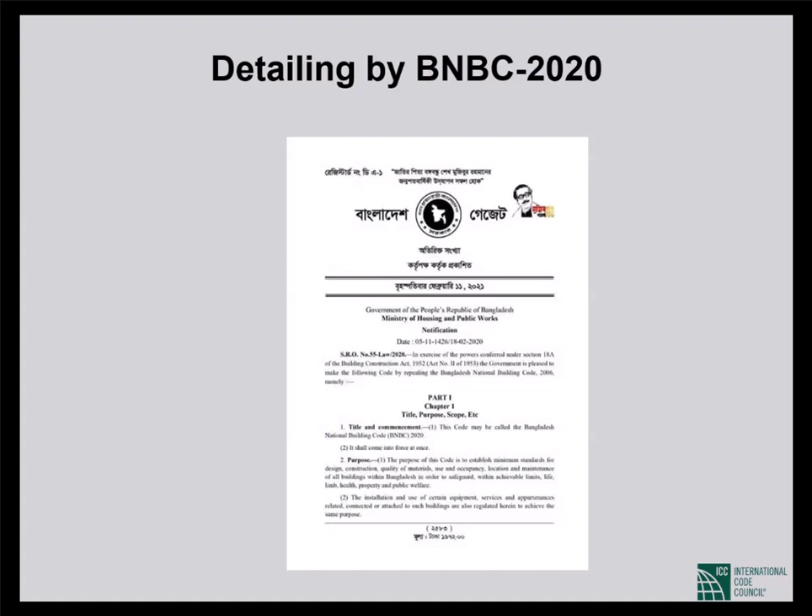The concrete and seismic concrete design provisions, including seismic detailing requirements of BNBC 2020, are based on those of ACI 318-08 edition, and that is kind of significant. I also mentioned yesterday that ACI has gone through 3 more editions since the '08 edition was published: 318-11 three years later, then 318-14, and then the latest, 318-19.

Between 318-08 and 11, there was at least one change that we will discuss at the very end of today's seminar.

In 318-14, there were major changes to shear wall detailing requirements that I have decided to bring into this seminar, and you will see that those are kept very separate. 318-19 has further changes that are kind of complicated, and I have decided not to go there. It's a long way off for you, I think, and too many editions would probably be confusing. So we will keep to 318-08.

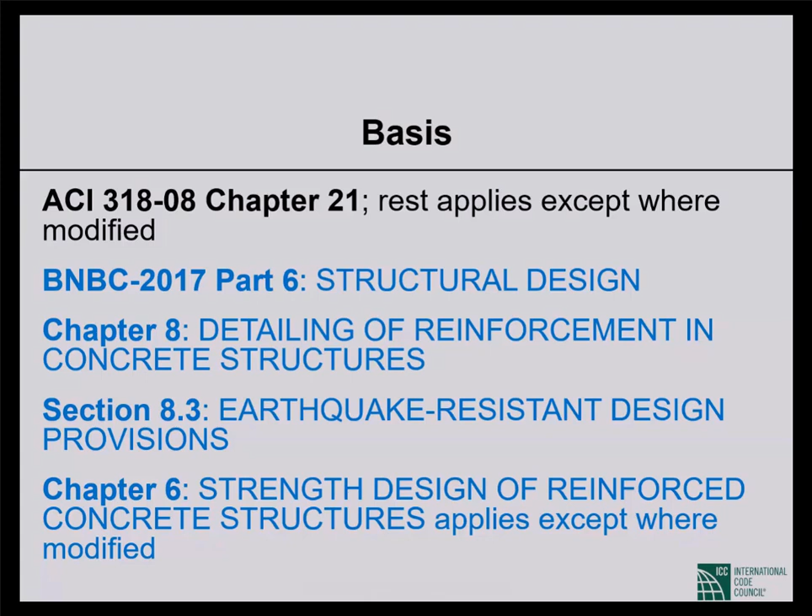Just as when we detail or design by chapter 21 of 318 the remainder remains in effect, when we design or detail by section 8.3, chapter 6 of BNBC 2020, which is strength design of reinforced concrete structure, it remains applicable unless something in there has been specifically modified in section 8.3. This is kind of important. I didn't have a similar slide yesterday because I pretty much kept to the 2008 edition of 318.

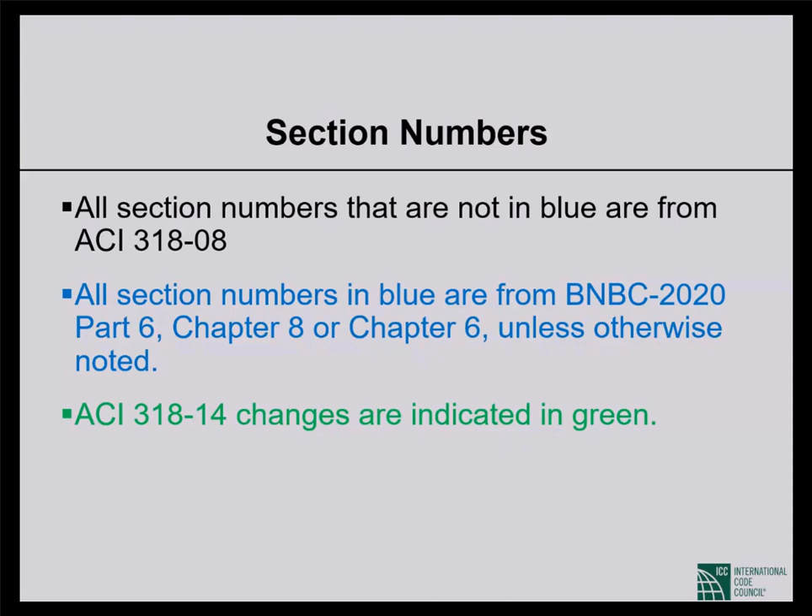All section numbers not in blue are from ACI 318-08. I should have said blue or green. All section numbers in blue are from BNBC 2020 Part 6, Chapter 8 or Part 6, Chapter 6, unless otherwise noted. ACI 318-14 changes are indicated in green. So keep that in mind: blue is BNBC and green is 318-14.

Inelastic deformation capacity is the ability of a structure to continue to carry full factored gravity loads as it deforms beyond the stage of elastic response. Elastic response doesn't have to mean force proportional to displacement—there is nonlinear elasticity—but elastic response does mean there will be no residual displacement after the earthquake passes, no damage to repair. So that is elastic response.

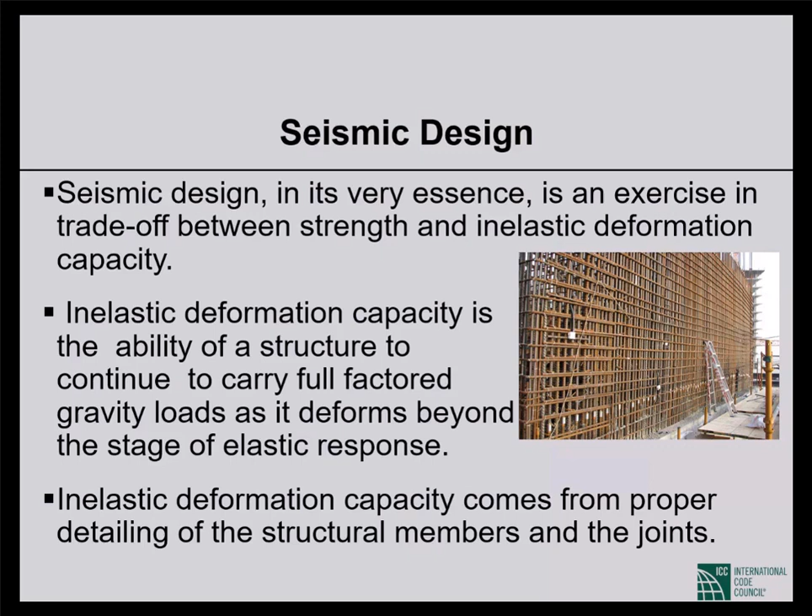We are saying inelastic deformation capacity is the ability of a structure to continue to carry full factored gravity loads as it deforms beyond the stage of elastic response. Inelastic deformation capacity comes from proper detailing of the structural members and the joints. So it is a trade-off: we can design for high strength and low inelastic deformability, or low strength and high inelastic deformability, or medium strength and medium inelastic deformability.

Chapter 16 of the IBC, which is part 6, section 2.5 of BNBC 2020, sets the design force level or strength. The code tells us the force level we need to design for, depending on the structure, the seismic hazard at the site, and so forth. Detailing rules are given in the materials chapters, which is chapter 19 of the IBC.

That's part 6, chapter 8 of BNBC 2020 for concrete. Chapter 21 of the IBC for masonry is part 6, chapter 7 of BNBC 2020. Chapter 22 of the IBC for steel is part 6, chapter 10 of BNBC 2020. Chapter 23 for wood is part 6, chapter 11 of BNBC 2020.

The materials chapters reference material standards. For concrete, the standard is ACI 318. So when you go to chapter 19 of the IBC, you don't find a lot of provisions there, because you are simply referred back to ACI 318.

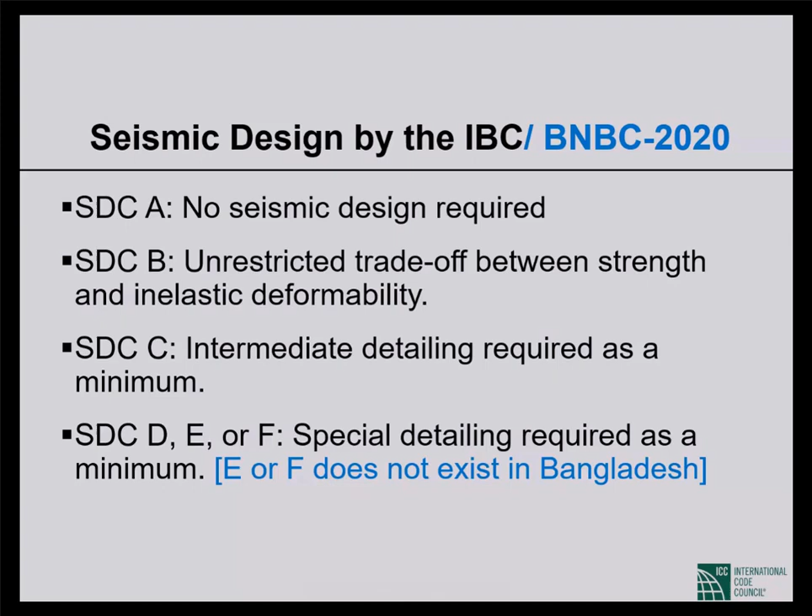Now, shear walls can be used in bearing wall systems, building frame systems, or dual systems. And dual systems are of two kinds in ASCE 7 and BNBC: dual systems featuring intermediate moment frames and dual systems featuring special moment frames.

If we have special reinforced concrete shear walls as part of a bearing wall system, R value is 5. And if we have ordinary reinforced concrete shear walls, R value is 4. There is no intermediate reinforced concrete shear wall recognized in our codes and standards. There is an intermediate shear wall that is precast, but we will not go there. We are not discussing precast. It is not mentioned in BNBC 2020.

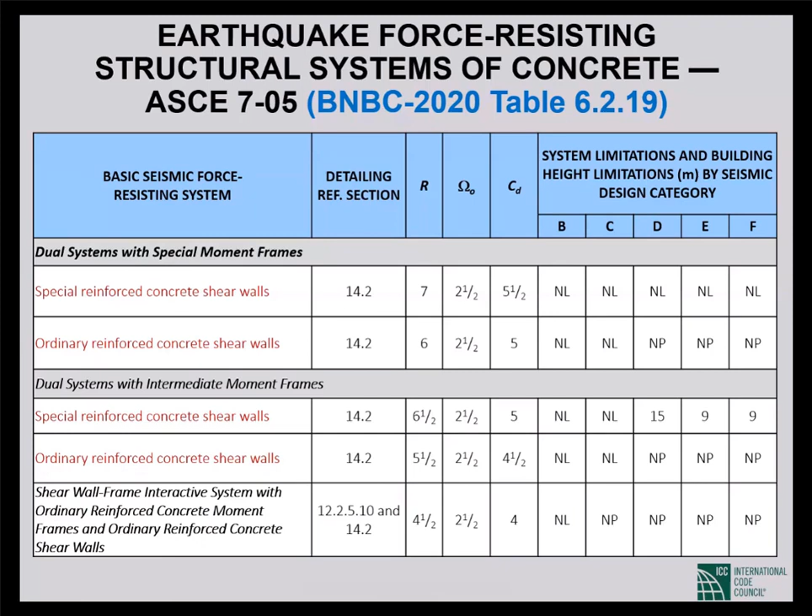Dual system with intermediate moment frame, if it has special reinforced concrete shear walls, R is 6.5. Ordinary reinforced concrete shear walls, R is 5.5.

But this dual system with intermediate moment frame has restrictions on applicability. In high seismic design category, in your case D is the highest, 15 meters should be the height limit on the structural systems. And the dual system with intermediate moment frames and ordinary reinforced concrete shear walls is not even permitted. So you have to look at these restrictions. Actually, this is about the only system where you will have to deal with restrictions.

Well, I didn't quite say it right. The ordinary detailing, as I said, is not allowed in design category D. So when it is ordinary reinforced concrete shear wall, you would expect it's not permitted in design category D. You see it here, you see it there, and you will see it on the earlier tables as well.

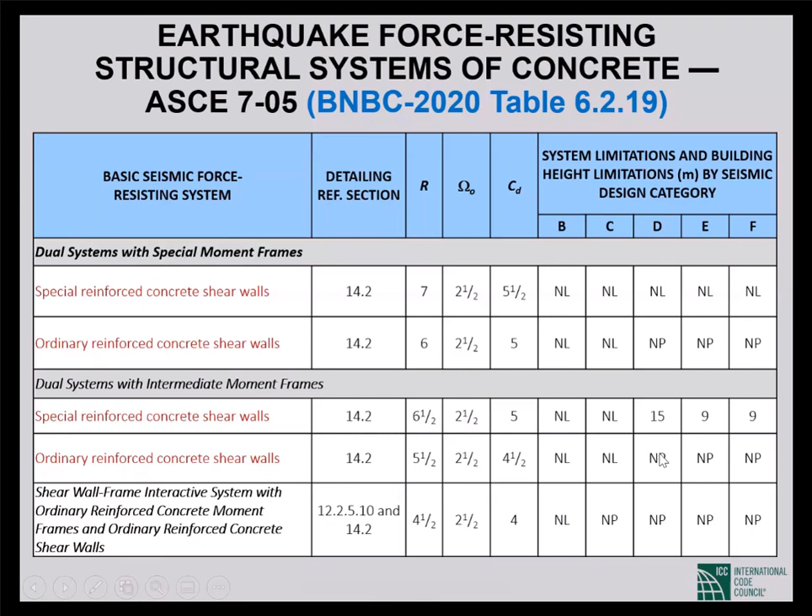Anyway, so that gives you an idea of the R values that we are dealing with. So for a special moment frame, R of 8. For a special shear wall, depending upon which structural system it is part of, R value varies between 5 and 7: 5 for a bearing wall system, 7 for a dual system with special reinforced concrete moment frames.

Then the restrictions on materials, these are the same as we discussed yesterday. The same restrictions on materials apply when you construct special moment frames or special shear walls of reinforced concrete.

I repeat, the restrictions on materials that we discussed yesterday apply to special moment frames of concrete. The same restrictions apply to special shear walls of concrete, as well as coupling beams that we will discuss today and wall piers that we'll discuss at the end of the seminar today. So the same restrictions, I will go over them quickly.

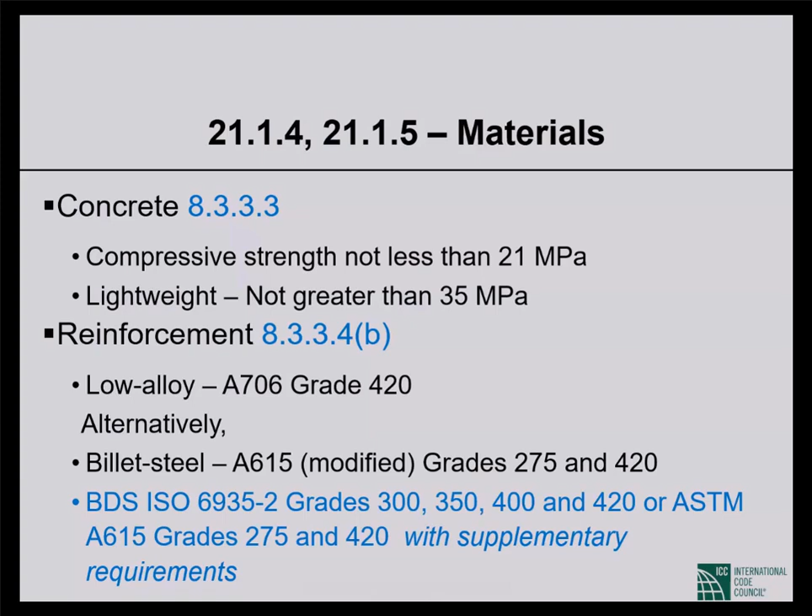BNBC 2020 allows the same A615 grades 275, which would be 40 KSI, and 420, which would be 60 KSI, with supplementary requirements. But BNBC also allows Bangladesh standard ISO 6935-2 grades 300, 350, 400, and 420. I understand that quite a bit of that reinforcement is used, but anyway, that's the only difference between ACI 318 and BNBC 2020. This Bangladesh standard reinforcement is allowed in high seismic applications.

The supplementary requirements for A615 rebar steel for high seismic applications. These we also went over yesterday.

The actual yield strength shall not exceed the specified yield strength by more than 18,000 psi. Upon retest, you can go another 3,000 psi, but that is the maximum allowed. This retest requirement was in 318-05. I didn't find it in 318-08, which is why I put it in blue. It is part of BNBC 2020, though. You have that in there.

As I mentioned yesterday, this is an extremely important supplementary requirement. This requirement is already part of ASTM A706, but for A615 this is a supplementary requirement for seismic applications. This is important because in seismic applications, more is not better. If you have higher yield strength in your reinforcement than specified, the member reinforced with that steel will have higher flexural strength than you counted on. That member will attract higher shear forces to itself in an actual earthquake situation. You will not be correspondingly increasing the shear strength of the member, making brittle shear failure more likely. And that is not good.

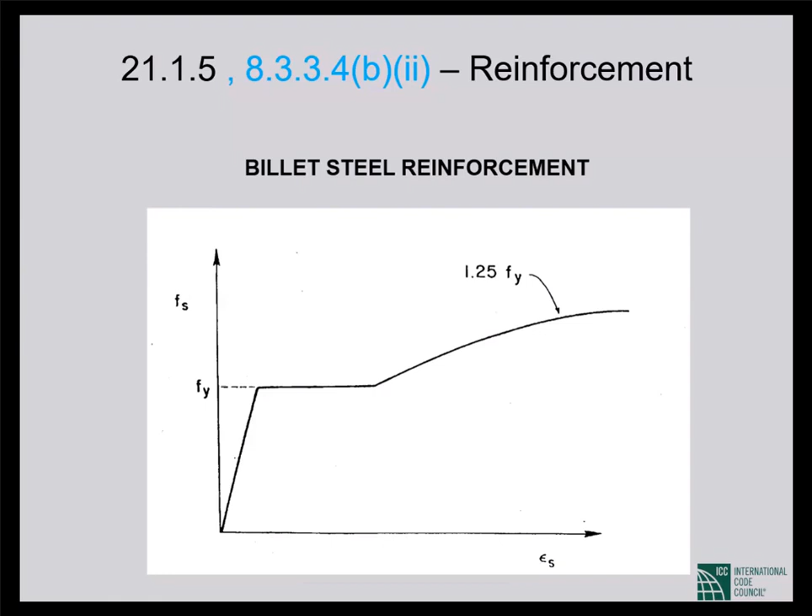And finally, the measured ultimate tensile strength shall be no less than 125% of the measured yield strength of the reinforcement. So, three supplementary requirements: the actual yield strength shall not be greater than the specified yield strength by more than 18,000 psi; the elongation over an 8-inch gauge length must be the same as that for A706 reinforcement; and the tensile strength to yield strength ratio shall not be any less than 1.25.

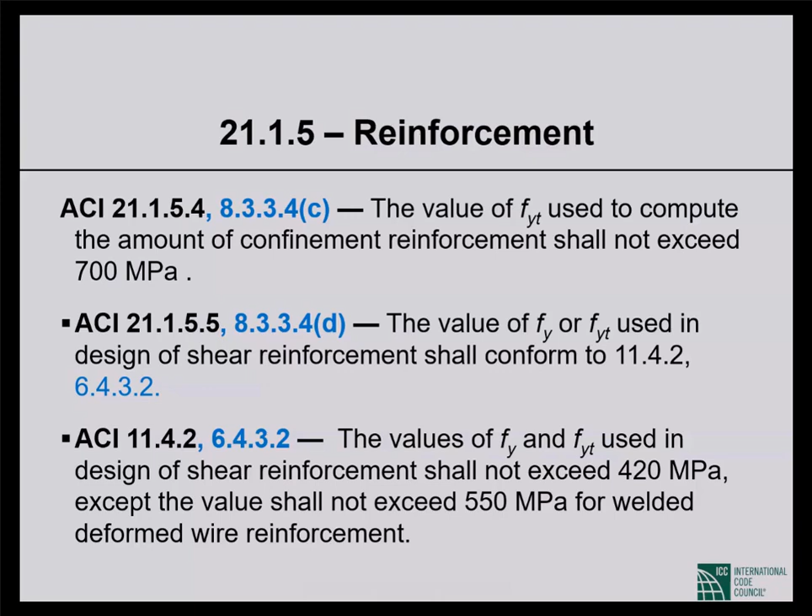If we allow shear computations based on higher yield strength, then we'll be looking at wide shear cracks, which are very objectionable. So this is why the restriction. But for confinement purposes, we are allowed up to 100 ksi yield strength of the transverse reinforcement, and yesterday I explained why that is very significant indeed.

So now we come to the design of special shear walls for shear. We have to design every structural member, if it is a column or a shear wall, for shear. We also have to design it for combined flexure and axial load. Typically with shear walls, we design for shear first, and then we proceed to designing for flexure and axial load, which comes after we are done with shear.

Now, this is the first significant green that you see in my slide set. Green, remember, is 318-14. Requirements for special shear walls changed in significant ways in ACI 318-14, in view of lessons learned from the Chile earthquake of 2010.

So the shear wall requirements of ACI 318-08 that we are discussing today started in the 318-99 edition. From 99 through 2011, the provisions remained essentially unchanged—we made maybe little changes here and there, but essentially unchanged. Then in 2014, very significant changes that cover many aspects of shear wall design, and as I mentioned, we will not go there today. In the 2019 edition, there is a further round of significant changes.

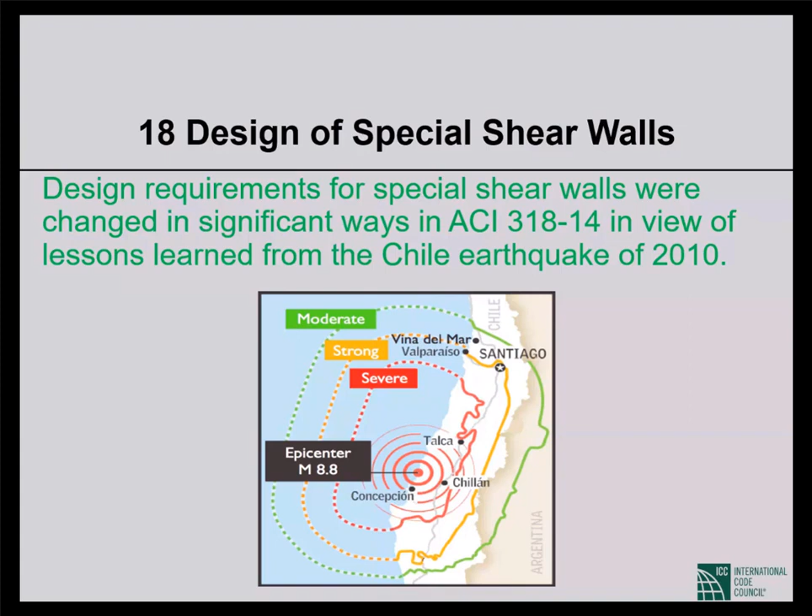Now, as in the design of any member, in the shear design of shear walls, the required shear strength Vu must be less than or equal to the design shear strength—the nominal shear strength Vn reduced by a phi factor, which is typically 0.75, although there is a complication there in the design of shear walls that we will discuss.

Very importantly, you saw yesterday that in the design of beams as well as columns of special moment frames, we design for the maximum shear that can develop in the beam or the column. In the case of shear walls, we do not do that—we basically are not able to do that. We cannot figure out even today, with any degree of precision, the maximum shear that may develop in a shear wall section in the event of earthquake excitation.

So we design for Vu coming from analysis of our structure under code-prescribed seismic forces. This is very, very important: we are designing from shear obtained from elastic analysis, rather than the maximum shear that can develop in our shear walls.

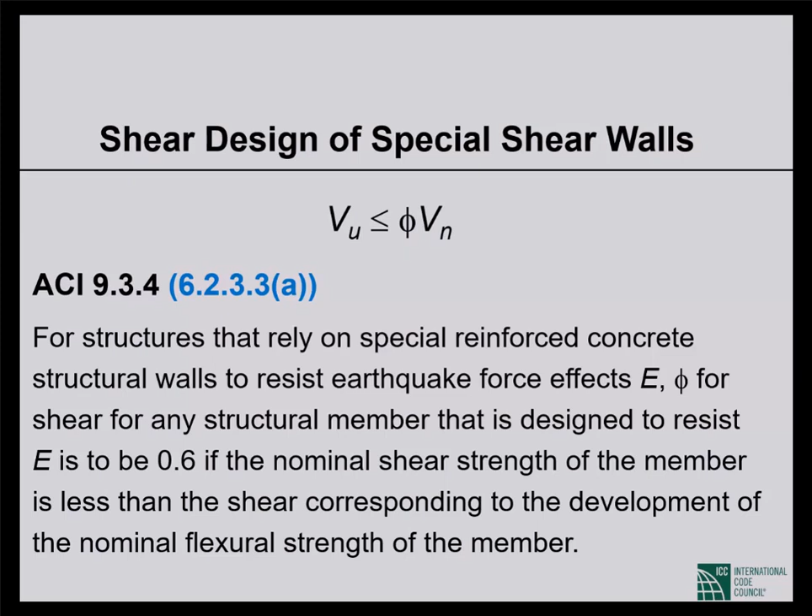So the V sub n is the shear carrying area of the shear wall, A sub CV, times the two contributions to shear strength: concrete contribution, alpha sub c times square root of f sub c prime, and the steel contribution, rho sub t times f sub y.

But let me put it this way. If you look through ACI 318, concrete can carry 2 square root of f sub c prime. In your units, I believe the number is 0.17 square root of f sub c prime. Concrete is always good for 2 square root of f sub c prime.

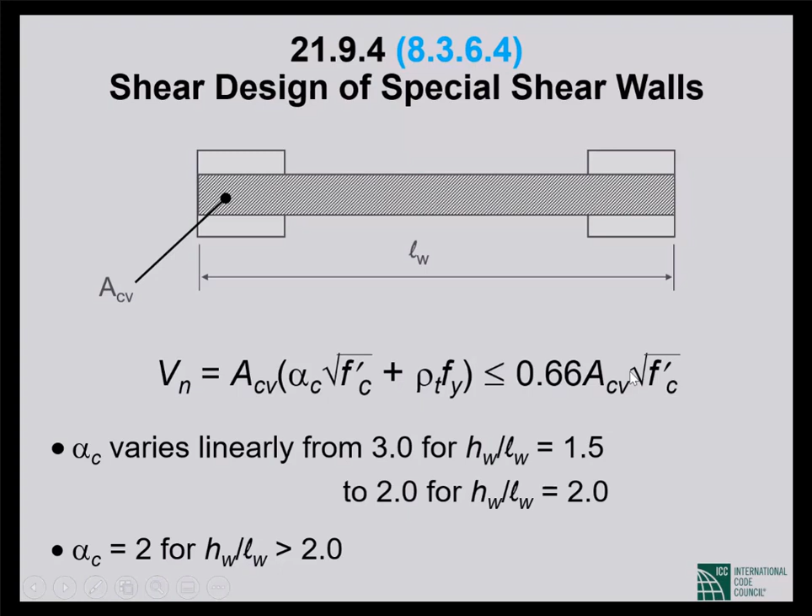This is because when the shear is very high - imagine a shear wall with a point lateral load applied at the top - when that horizontal load is very high, it will be transmitted to the foundation through diagonal struts that form within the shear wall. Those diagonal struts will crush in compression under high shear load, and no amount of reinforcement will prevent that compression crushing. So this limit is the upper limit; you cannot go beyond that.

Shear design - okay, the ratio. This is a detail that I'll let you read. These are very important: the minimum longitudinal reinforcement ratio, you have to have 0.25% longitudinal reinforcement, which would be vertical reinforcement in a shear wall, at a spacing not to exceed 450 millimeters, that's about 18 inches.

So, minimum vertical reinforcement: 0.25%, maximum spacing 450 millimeters. Horizontal reinforcement also minimum 0.25%, maximum spacing 450 millimeters. You shall provide 2 curtains of reinforcement when V sub u, the required shear strength, exceeds 2 square root of f sub c prime. ACI 318-14 says, or when height-to-length ratio is larger than or equal to 2.

So from 318-14 onwards, we have to provide 2 curtains of reinforcement in the taller, slenderer shear walls - height to length ratio larger than or equal to 2 - irrespective of how much shear you are dealing with. But shear exceeding 2 square root of f sub c prime will also trigger 2 curtains of reinforcement. Now, I would like to say that... how do I want to put it?

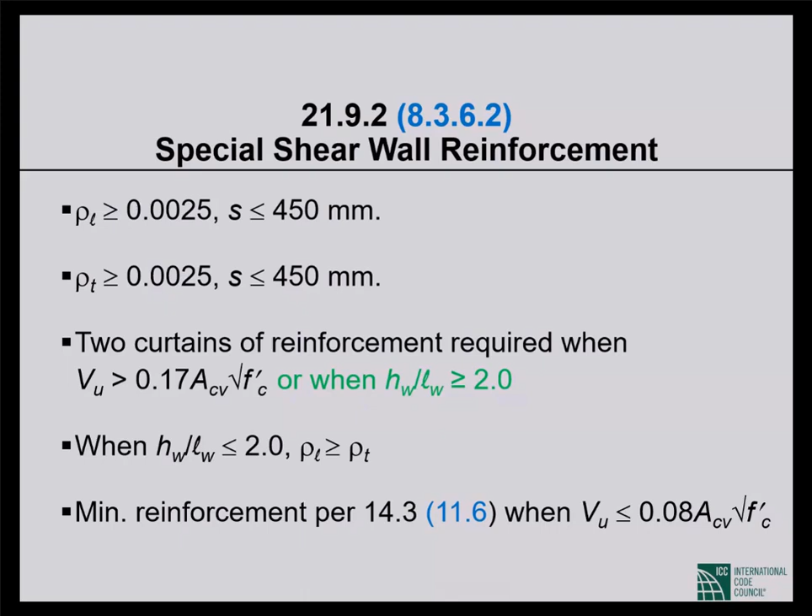Now, if the shear is less than 1 square root of f sub c prime, 0.08 in your unit square root of f sub c prime, then your horizontal reinforcement is shrinkage reinforcement. It's not shear reinforcement really. There is hardly any shear. And then those minimum requirements can be relaxed. 0.25% can be down to, I don't remember, 0.2 or even lower, 0.18%, I think is allowed. This is now chapter 14 of ACI 318, your section 11.6. You take your minimum from that section. Okay, it's no longer 0.25%.

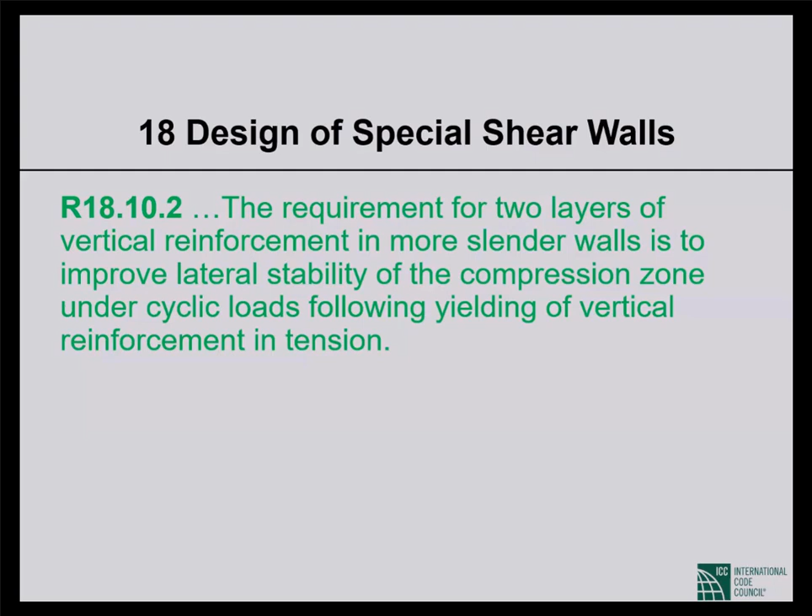This is a 318-14 commentary. When you see R in ACI 318, it is a commentary section. Every other document's commentary is C. In ACI 318, commentary is R. The idea is that the ACI 318 standard itself is a standard which eventually becomes code when adopted by a jurisdiction. The commentary is a report from ACI Committee 318. It never becomes legal or code. The R stands for report. Anyway, the commentary says the requirement for 2 layers of vertical reinforcement in more slender walls is to improve lateral stability of the compression zone under cyclic loads following yielding of vertical reinforcement in tension.

Okay, now special shear wall design for flexure and axial compression.

Yesterday I was quite confused about time. It's approaching 8:30 in Dhaka. So no, I have time. No, I don't think it should be a problem today. Okay.

This is the only time that I will take you back to 318-95, which was the 318 edition preceding 318-99, when I said the current shear wall design was first introduced. Okay, so back in those days, 318.95 and earlier, in designing a shear wall, what we had to do was to calculate...

Let's look at this picture. So we used to take the factored axial load tributary to the shear wall. It is not the weight of the wall; this is all the load that we are dumping onto the shear wall. So factored axial load tributary to the shear wall, divide that by the gross cross-sectional area, that gives us a uniform compression across the shear wall section. Then we took the factored overturning moment at the base of the shear wall, which should be caused by the code prescribed seismic forces, divided by the gross moment of inertia of the shear wall section, multiplied by half the length of the shear wall.

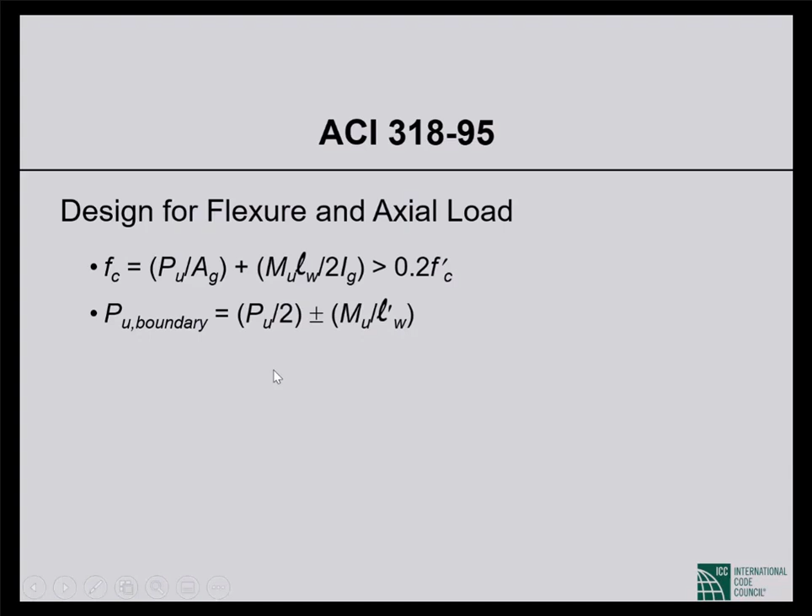This resulted in very large boundary elements with extremely large amounts of vertical reinforcement required, as you would imagine.

Let me talk about the confinement. Let me go to the picture and then come back to the two slides.

This is a building we designed in the UBC days, quite some time ago. A concrete building, frames on the periphery, and L-shaped shear walls in the core. The shear walls are boundary elements, I think the picture is pretty clear. This was UBC seismic zone 4, a 20-story tall building. The beam sizes are given, the column sizes are given, and the walls are 300 millimeters thick.

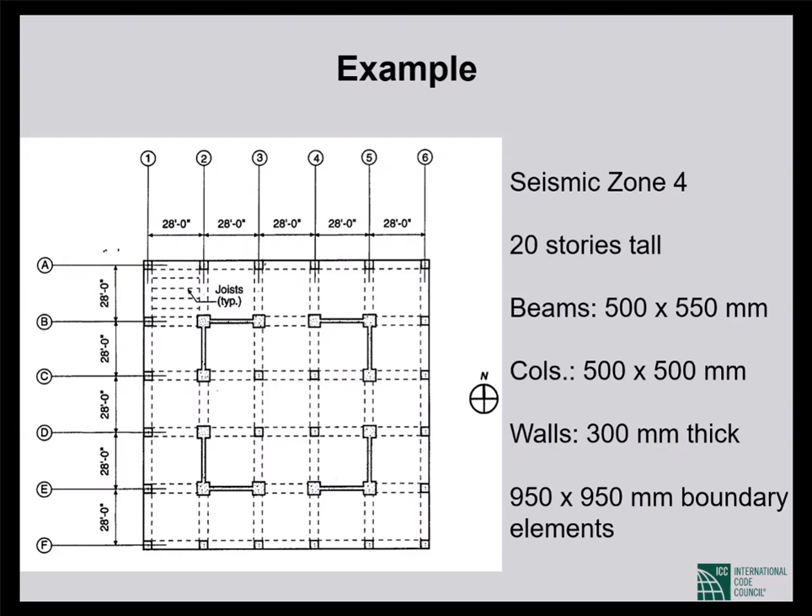So far it's not good, but the actual nightmare is that these 36 number 11 bars had to be tied and cross-tied like column bars. Every other bar laterally confined by the corner of a tie or a cross tie, maximum spacing center to center between any two supported bars 14 inches, and maximum clear spacing between a supported bar and an unsupported bar 6 inches. So we were looking at one tie all around and then multiple cross ties in the two orthogonal directions. In a column, this had to be provided over the region of potential plastic hinging.

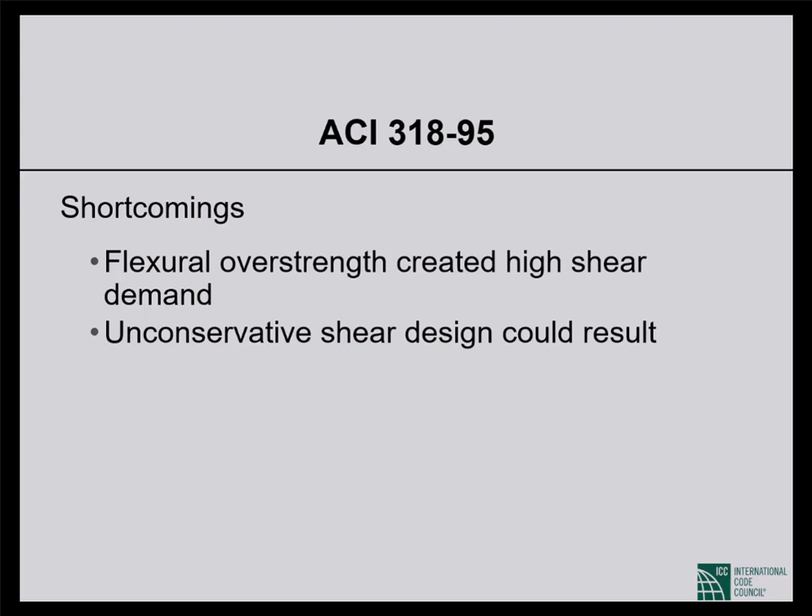So unconservative shear design was the result of providing all this flexural reinforcement. What looked like a very conservative thing was not even a safe solution - this was actually unsafe, unconservative.

ACI 318-99, or before that 94 UBC and 97 UBC, first said forget about discounting the web of the shear wall - that does not make any sense. That was a throwback to the days when shear walls used to be infill frames and the infill used to go in an earthquake. Now we have monolithic shear walls. So ACI 31899 said design a shear wall for flexure and axial load just as you design a column for flexure and axial load, with the entire cross section being effective.

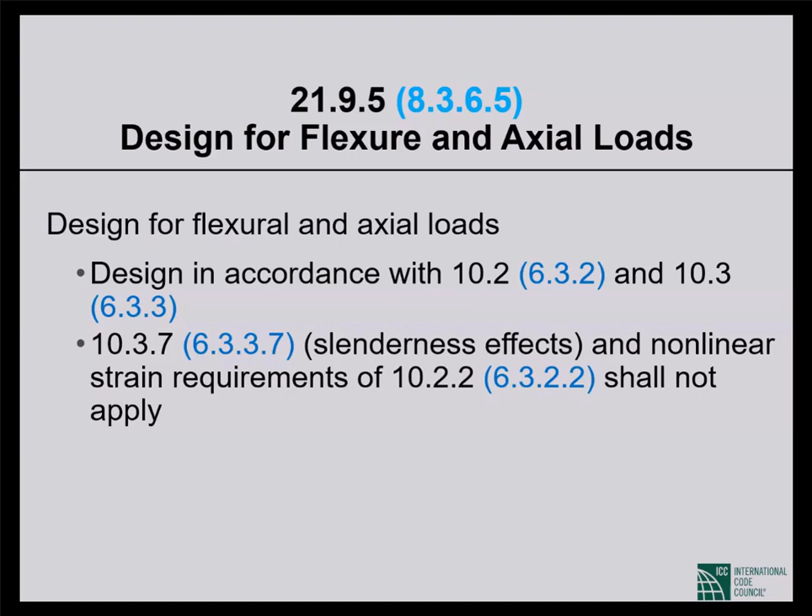And don't worry about slenderness effects or the fact that because a shear wall is a deep structural element, the strain distribution may not be linear - don't worry about those things. So design a shear wall as you would design a column under flexure and axial load. This was a huge change from the past.

Some details on effective flange width: if your shear wall has flanges, which is typically the case, the effective flange width is half the distance to the next cross wall, or 1/4 of the total wall height, whichever is smaller. So the effective flange width is 1/4 of the total wall height, except that you cannot encroach onto the flange of the neighboring cross wall - you can go only halfway to the other cross wall. This is a whole lot.

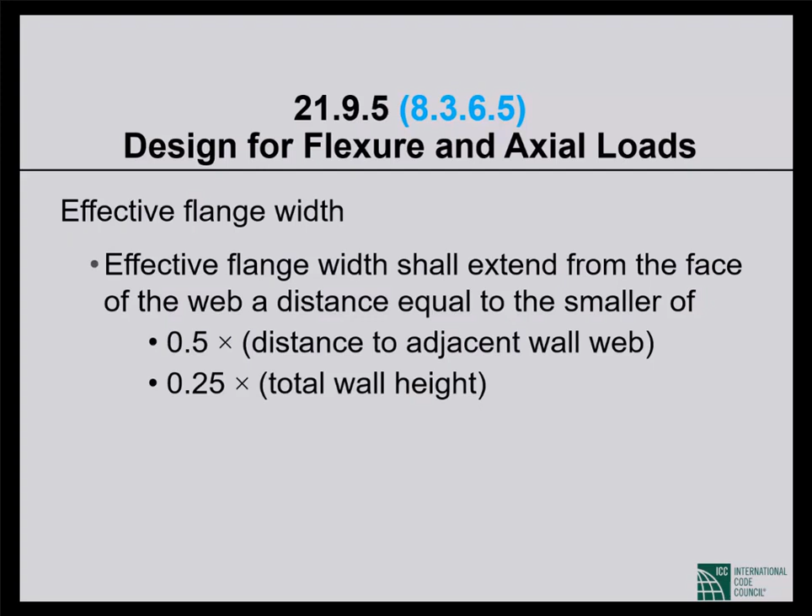So it is very seldom that you will have to ignore any part of a physical flange that you have. Anyway, so this is a very generous effective flange width.

Now, very importantly, there are two ways of designing, two ways of figuring out whether we need specially detailed boundary elements in our shear walls. One is called the displacement-based approach, that's 21.9.6.2 of ACI 318, 8.3.6.6B of BNBC. The other is the conventional approach that preceded the displacement-based approach, that is in 21.9.6.3 and 8.3.6.6C of BNBC 2020.

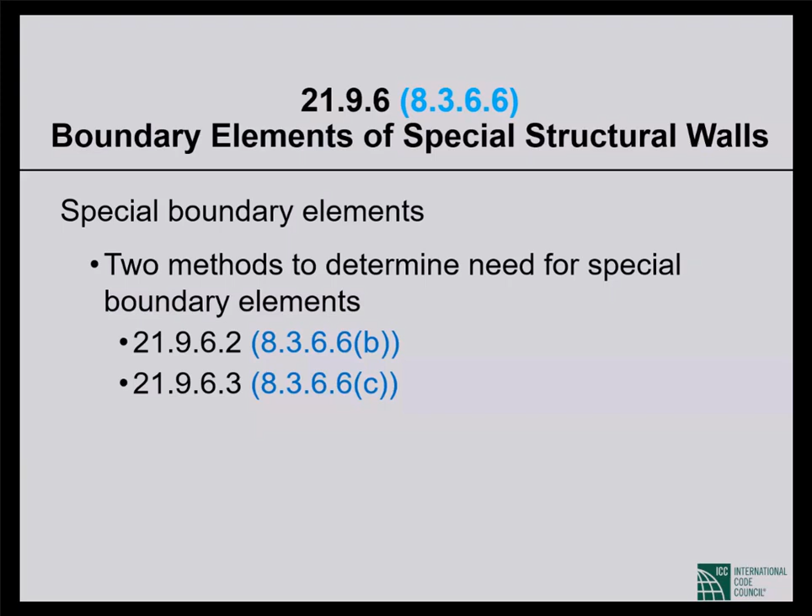The displacement-based approach is not applicable to all walls. It is applicable to cantilever shear walls hinging at the base. This is the best way to think about it. I will show you the 318 language on the slide, but we are basically talking about cantilever shear walls hinging at the base.

So the displacement-based approach is applicable to walls or wall piers that are effectively continuous from the base of the structure to the top of the wall. So it hinges at the base, not somewhere in the middle where the section changes all of a sudden, and is designed to have a single critical section for flexure and axial loads. Again, cantilever shear wall hinging at the base.

ACI 318-14 has said the height to length ratio in addition has to be larger than or equal to 2. So the displacement-based approach will not apply to shear-governed shear walls, it will only apply to flexure-governed shear walls. This is 318-14.

Now, this is the crux of the whole thing, and please listen to me very closely. So I made a statement that starting with 318-99, when we design for flexure and axial loads, we do not make any distinction between a column and a shear wall. That is fine, that is well and good. But practically looking and speaking, there is a huge difference between a column and a shear wall.

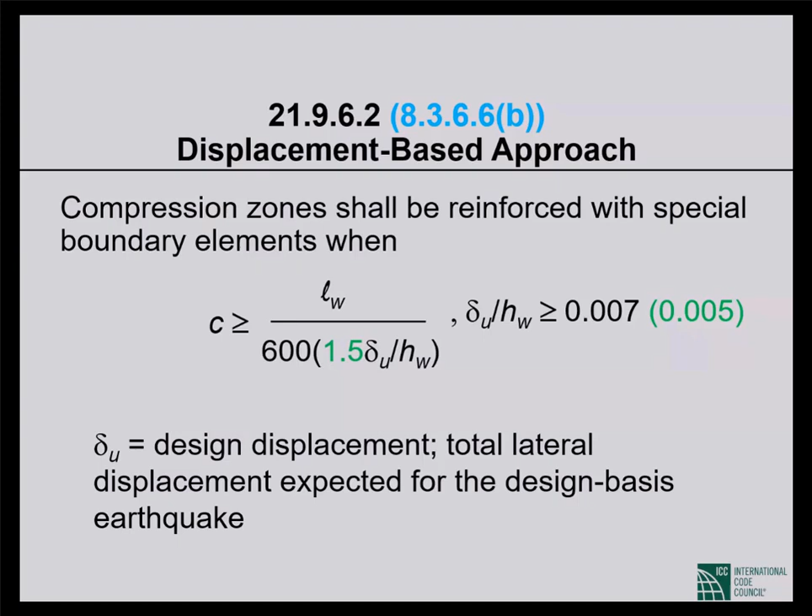Now, ACI 318-14 has injected the 1.5 factor in the denominator, thereby requiring many more shear walls to have specially detailed boundary elements. Let me not go into this 318-14 requirement. You will not be using it, you should not be using it, this is not your code. I just wanted to give you an idea of what is coming in the future, and there will be ample time to explain why this was done before that time. So let's stay without the 1.5.

Now, the neutral axis depth. Neutral axis depth is the distance from the extreme compression fiber to the neutral axis. That doesn't help you, because the problem is neutral axis depth depends on the axial load sitting on your shear wall. The larger the axial load, the larger the axial compression, the larger the neutral axis depth. In the extreme, if there is no bending moment, only axial compression, the neutral axis depth is infinity, since the entire section is under compression.

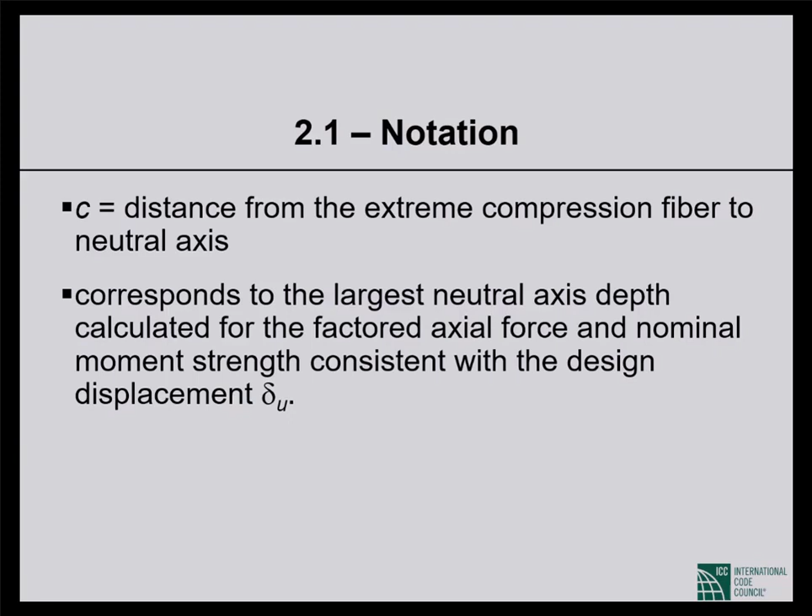So if we have a variety of axial loads on our shear wall to deal with in design, for the purposes of that check we would like to have the largest neutral axis depth. Whichever axial load produces the largest neutral axis depth is the load combination we should consider. You see what I'm saying? If we want to see if something is larger than something else, we would rather like an upper bound value of the thing we are checking.

So in seismic design, we have two load combinations to consider: the additive seismic and the counteractive seismic, that I've been talking about for a long time. The additive seismic load combination will always give you a higher axial load than the counteractive seismic. I do not know that there is ever any exception to that. So, the larger the axial load, the larger the neutral axis depth, remember?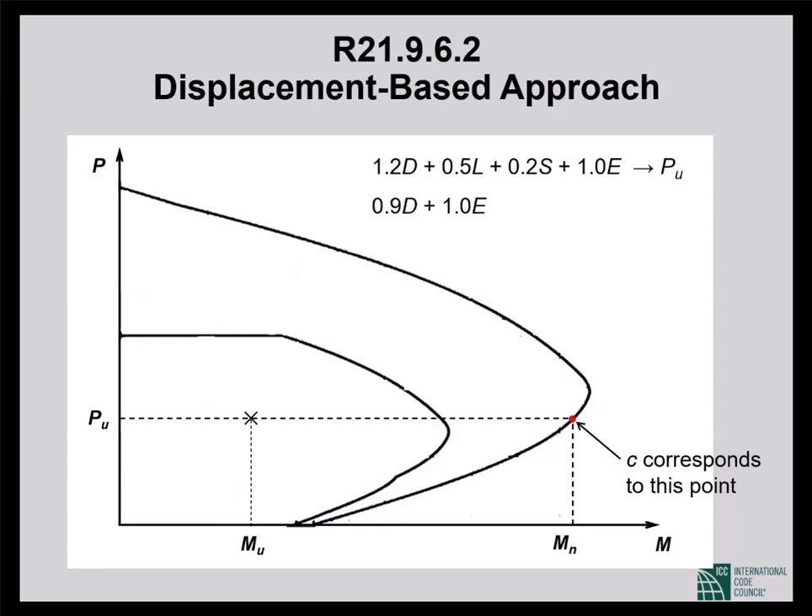That neutral axis depth exceeding critical neutral axis depth will trigger specially detailed boundary elements. Now, when special boundary elements are required by the displacement-based approach, the special boundary element reinforcement needs to extend vertically. So how far do we go vertically with this special confinement? The answer is L sub W, the length of the shear wall. If you have a 20-foot long shear wall, we go 20 feet along the height.

Or the factored bending moment at the base divided by 4 times the factored shear at the base, whichever of the two is larger. So, L sub w or M sub u divided by 4 times V sub u, whichever is larger, is the vertical extent of special confinement we must provide. The same extension of reinforcement is required below the critical section, except at the base of the shear wall, which is addressed in another section. So at the base, the special confinement goes at least 12 inches into the foundation.

That is the vertical extent of special confinement. Horizontally, how far do we go from the extreme compression fiber towards the neutral axis? The answer is 1/2 of the neutral axis depth, or the neutral axis depth minus 1/10 of L sub W, whichever is the larger of the two.

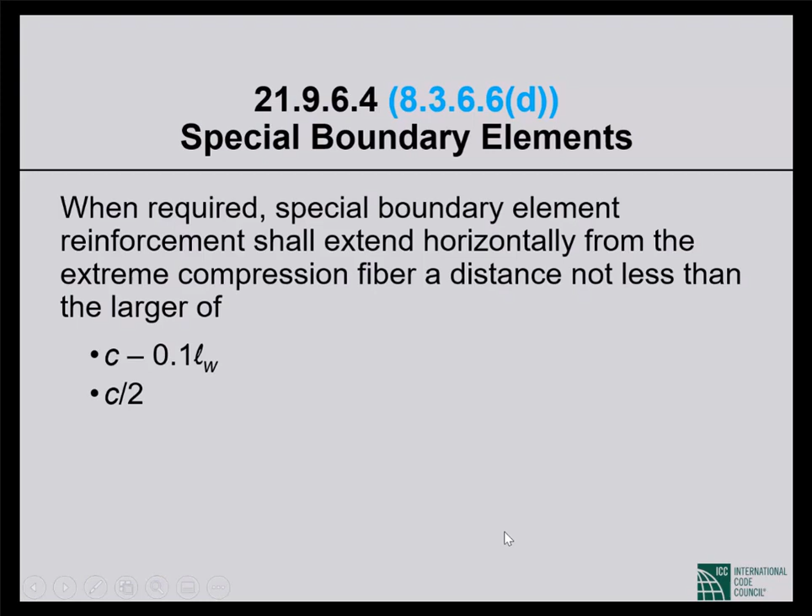So, the same extension of the reinforcement. We said that the special confinement shall be provided along the height of the wall for a length L sub W or M sub U divided by 4 times V sub U, whichever is the larger of the two.

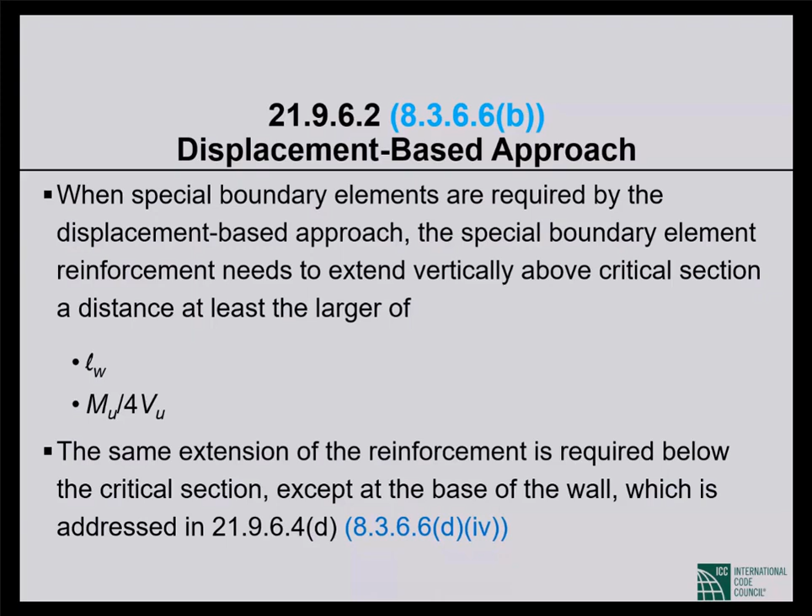The same extension of the reinforcement is required below the critical section, except at the base of the shear wall, which is addressed in another section. I said 12 inches into the foundation. That other section is here.

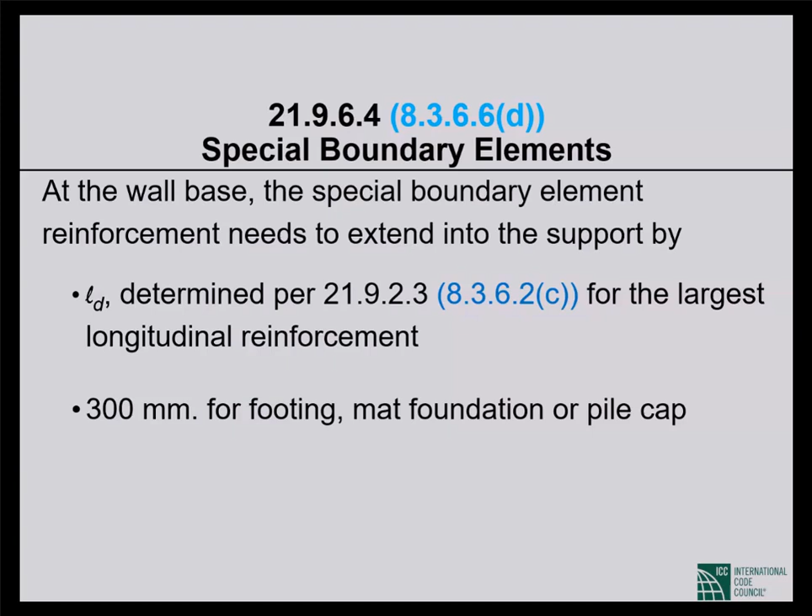So if the shear wall is sitting on anything but a foundation, then you go one development length of the largest longitudinal bar into that element. It could be a pedestal or something like that. If, however, the shear wall is sitting on a footing, mat, or pile cap, which is the usual thing, then as I said, you go 12 inches into the foundation.

ACI 318-14 has brought back something we had in UBC 94 and 97, but was dropped in ACI 318-99, which is a minimum thickness out of concern for out-of-plane buckling of shear walls, which had never been observed outside of the lab. But then in the earthquake in Chile 2010, and then the two big earthquakes in Christchurch, New Zealand in 2011, we actually did see shear wall buckling, out-of-plane buckling of actual shear walls. So now the minimum thickness requirement was brought back.

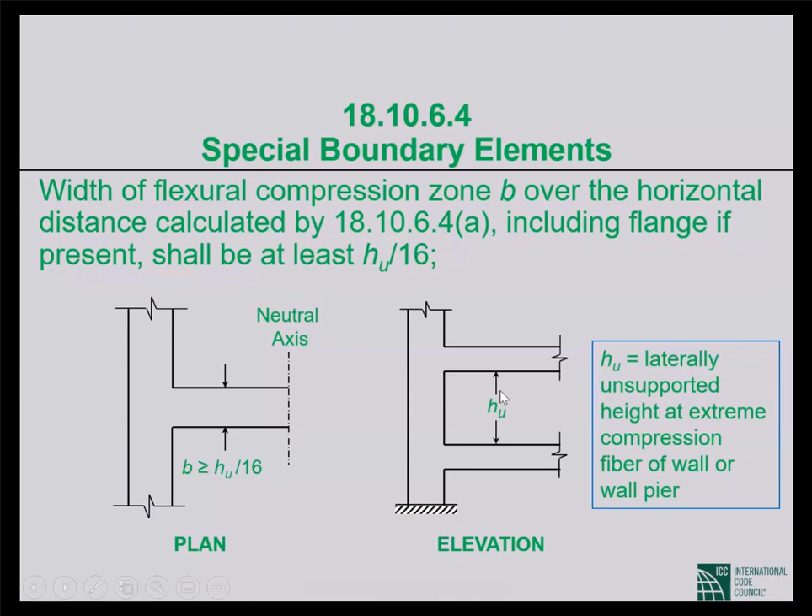So the requirement is that in the specially confined boundary element region - you know what that is, it includes the flange - you go half the neutral axis depth or neutral axis depth minus 1/10 of L sub W into the shear wall. You also have to go at least 12 inches from the flange-web interface into the web. So over that compression zone, the thickness of the shear wall shall not be any less than 1/16 of the unsupported wall height.

Now, in addition - I don't want to go through all of this - if your wall is not tension controlled, and the index of that is neutral axis depth is larger than or equal to 3/8 of L sub W, calculated neutral axis depth, then there is no assurance that your wall is going to be tension controlled. In that case, we have a 12-inch minimum on the thickness of the compression zone of the shear wall.

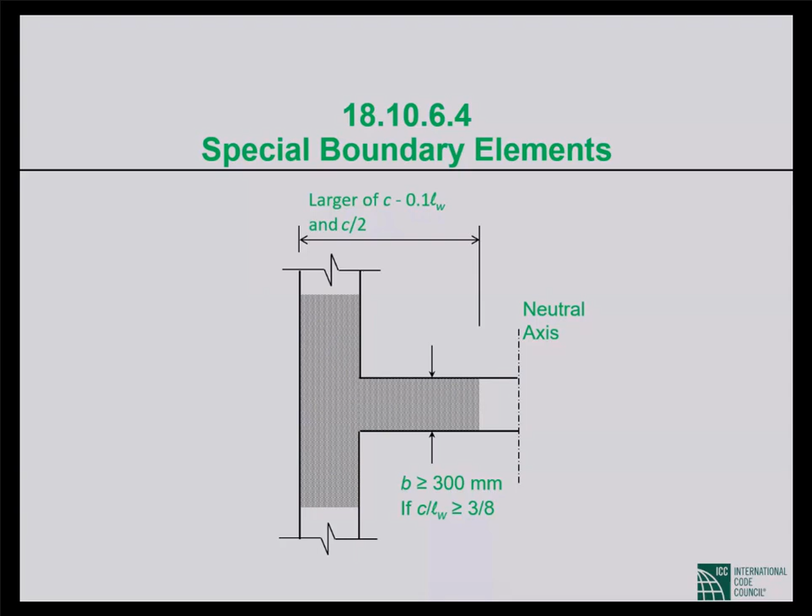So it is probably unlikely that you will go for a thinner web outside of the specially confined boundary zones. But anyway, technically, the minimum thickness applies to the specially confined boundary elements of the shear wall, not to the entire shear wall. So it is 1/16 of the unsupported height, subject to a minimum of 12 inches, if the minimum applies only for shear walls that are not necessarily tension controlled.

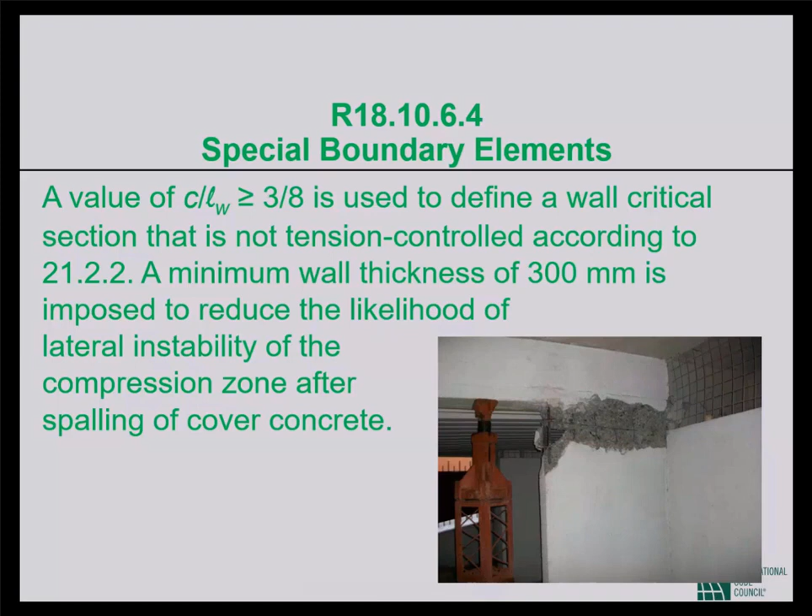This is commentary to the 12-inch requirement. A value of C larger than or equal to 3/8 of L sub W is used to define a wall critical section that is not tension controlled according to section such and such. A minimum wall thickness of 300 millimeters is imposed to reduce the likelihood of lateral instability of the compression zone after spalling of cover concrete. Pretty clear commentary.

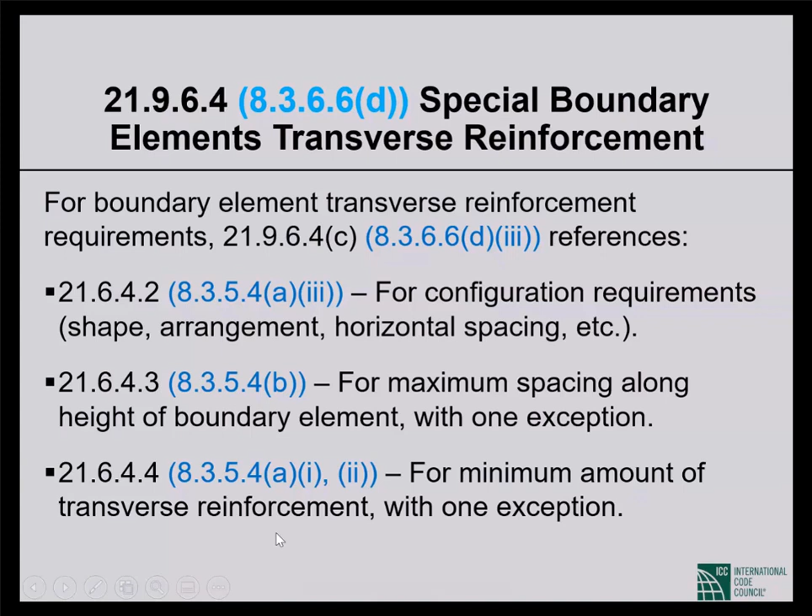Now, this specially confined boundary element, boundary zone, whatever - what is this special confinement? That's the subject of this section. We have a subsection that gives configuration requirements: shape, arrangement, horizontal spacing, etc. Then another subsection on maximum spacing along the height of the boundary element, with one exception. And a third subsection on minimum amount of transverse reinforcement, with one exception.

Let me skip the word slides. I will let you read them at your leisure. So let me tell you that

the main thing, or the crux of it, is a specially confined boundary zone is essentially the same as the potential plastic hinge region of a special moment frame column. Let me check the time again.

So we started at 7:30, 9 o'clock, so I have... Okay, so yeah, no problems. Somehow after yesterday, I'm kind of nervous. Okay, so yeah, we have time. I think it will work out today.

So the specially confined boundary zone of a shear wall is essentially the same as the plastic hinge region of a special moment frame column. We provide the same confinement with just two exceptions. A specially confined boundary element must be tied and cross-tied like the plastic hinge region of a column. Same requirements apply as before.

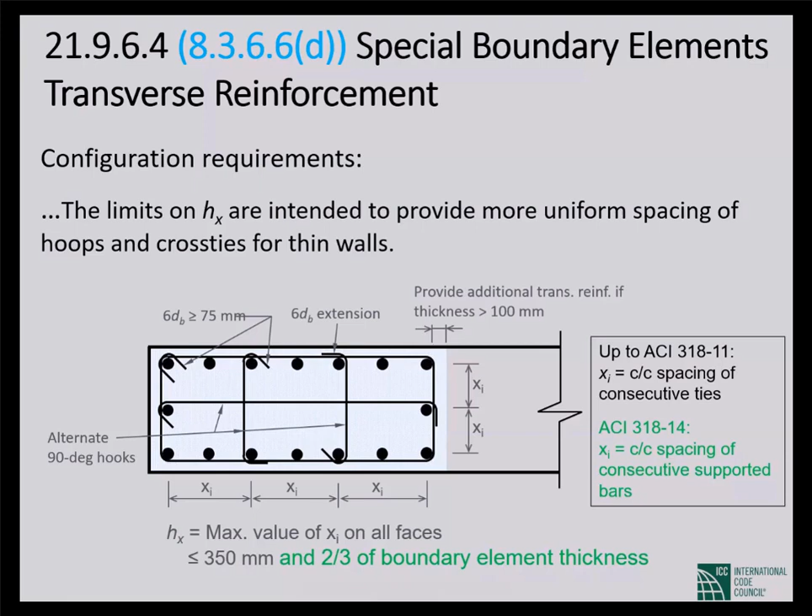Now I said there are two exceptions. The shear wall boundary zone confinement is the same as the confinement of the hinging region of a column, with two exceptions. One exception: the maximum spacing limitation for a column hinging region states the spacing of transverse reinforcement shall not exceed 1/4 of the minimum column dimension. Remember, that 1/4 has been relaxed to 1/3 of the minimum dimension of the boundary element. This is the first exception.

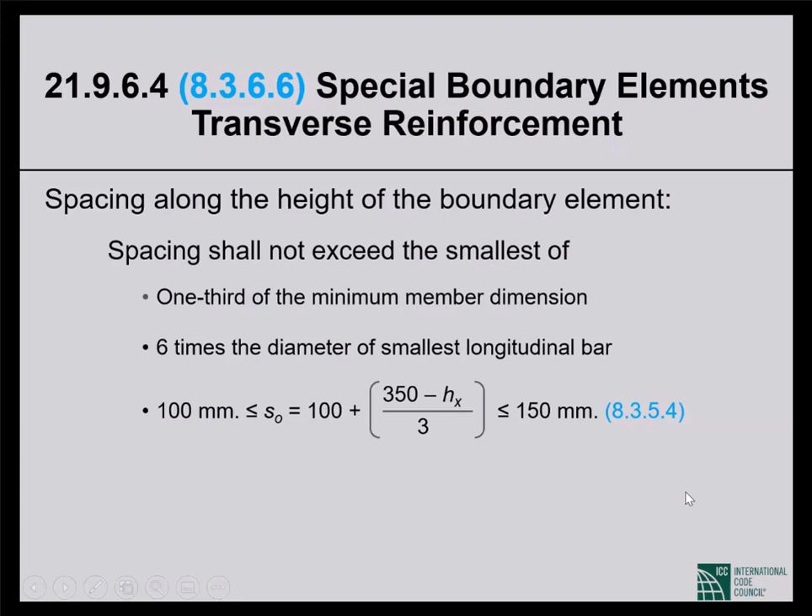So in the case of a column, the spacing cannot exceed 1/4 of the minimum column dimension. In the case of a shear wall boundary element, the spacing cannot exceed 1/3 of the plan dimension of the boundary element. The rest is the same: 6 times the diameter of the smallest longitudinal bar, and S sub x or S sub 0 - whatever that notation has changed to over the years - which varies between 4 and 6 inches. The second exception is that in the case of a column hinging region,

the minimum cross-sectional area requirement of the transverse reinforcement is given by two different expressions, and the larger amount governs. ACI 318 up to the 2011 edition exempted this first equation - that was the second exception. For shear wall boundary element confinement, we went by the second equation only; the first equation did not count. 318-14 has brought the first equation back, but that's into the future for you.

So for you, the two exceptions are: the spacing of transverse reinforcement shall not exceed 1/3 of the boundary element's minimum plan dimension, as opposed to 1/4. And the second exception is that the minimum cross-sectional area of transverse reinforcement is given by this one formula rather than two different formulas. 318-14 has brought this first formula back.

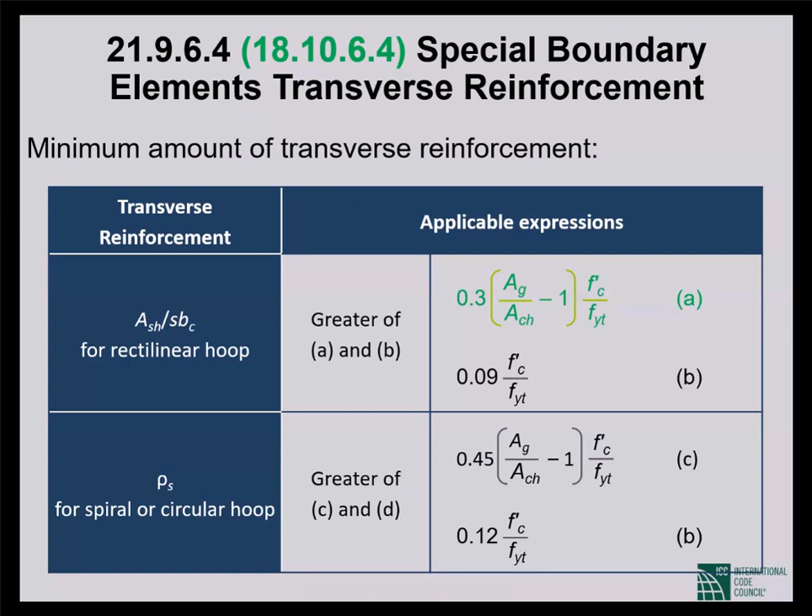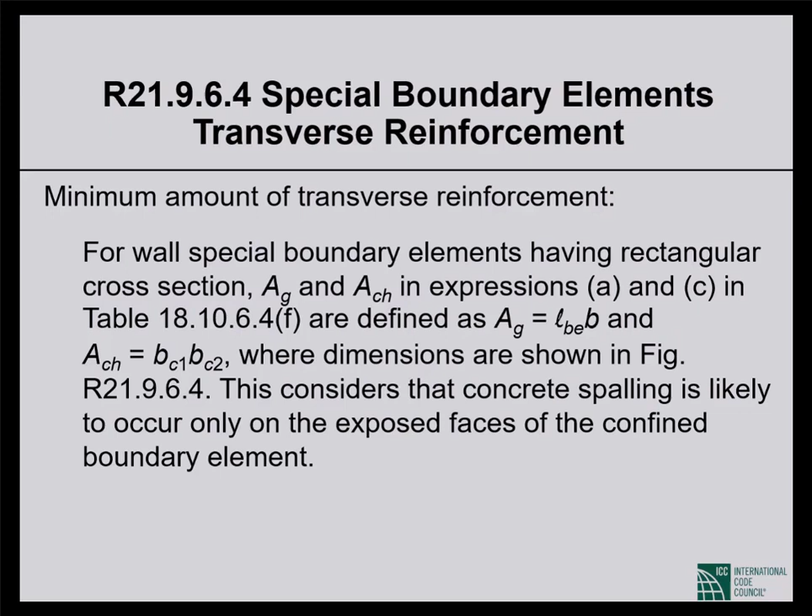Now, if you want to use the first formula, you will need to figure out the gross cross-sectional area and the confined cross-sectional area of the transverse reinforcement - that's where these commentary sections come in. With the help of this figure and the text of the commentary, you will be able to figure out the A sub G and A sub CH. I need not go there - this is 2014 stuff.

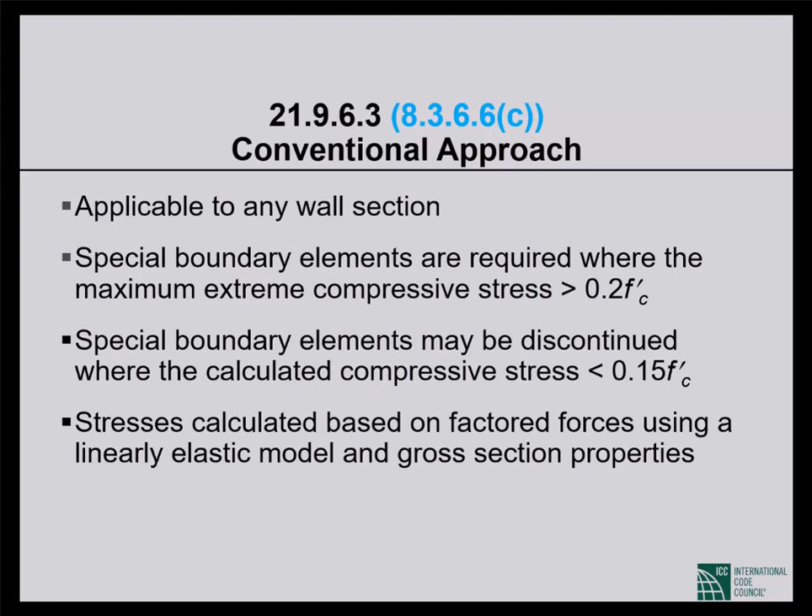So now the trigger is this combined compressive stress exceeding 20% of F sub C prime. This is not greater than or equal to—this is greater than.

Now, I want to stress very emphatically that when we go back to the old trigger, the extreme fiber compression stress exceeding 20% of F sub C prime, we do not go back to neglecting the web of the shear wall in designing for flexure and axial load. We never do that anymore since ACI 318-99. The entire shear wall section counts.

So when that trigger goes off and we conclude that we must provide confinement over part of the shear wall section, horizontally, what we confine is the same as in the displacement-based approach. So it is 1/2 of the calculated neutral axis depth, or the neutral axis depth minus 1/10 of L sub W, whichever is the larger of the two. So even when we are using the conventional approach, we will have to calculate neutral axis depth. That does not go away.

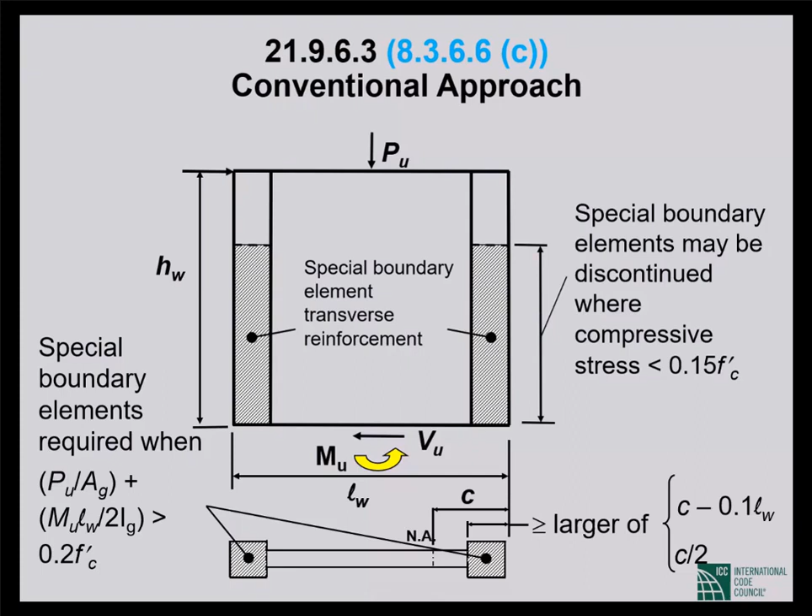Vertically, we will discontinue the special confinement only when the combined compressive stress under P sub U and M sub U drops below 15% of F sub C prime, as I have said multiple times already.

What is special confinement? I said that it is the same as what we provide in the hinging regions of special moment frame columns, with two exceptions. So this is that in the picture. Now, first of all, I do want to make a point, as made in the picture, that a specially confined boundary element does not mean necessarily a thickened shear wall or a shear wall with a flange or a column at the end. No, it can be a rectangular shear wall, no thickening of the ends.

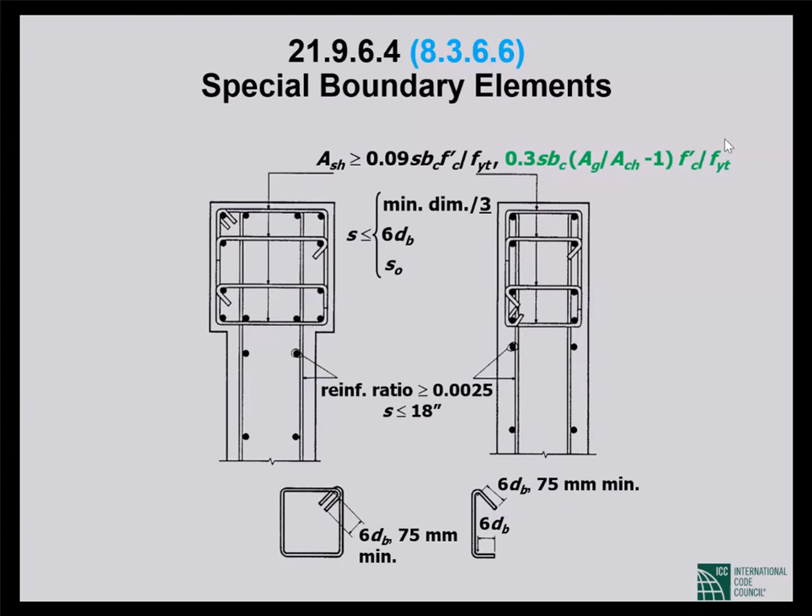The specially confined boundary zone is the specially detailed part of the wall. It does not require any thickening. Then the two exceptions are the maximum spacing limitations—this is 1/3 of the minimum plan dimension, would have been 1/4 in the case of a column—and the minimum cross-sectional area of the transverse reinforcement is given by this one equation, whereas in the case of a column it is given by two different equations, whichever is larger. Now that equation, as I mentioned, has been brought back by ACI 318-14.

Now the horizontal shear reinforcement will not do you any good unless it is properly anchored. So typically what we do is provide standard hooks at the end, and then the hooked part development length. So the shear reinforcement has to be fully developed at the face of the shear wall.

So the L sub DH distance can be taken from the face of the boundary element. If you are of a more conservative bent, you will take it from the outer face of the confinement reinforcement, as shown in the picture. That is probably a better way to go. So we will fully develop the horizontal reinforcement at the outer face of the confining reinforcement.

So that distance has to be L sub dh, hooked bar development length, or these days you can go for headed bars, in which case it will have to be the headed bar development length, L sub dt, rather than L sub dh. We have also stipulated specifically that you shall bring the end of the shear reinforcement within 6 inches of the end of the shear wall.

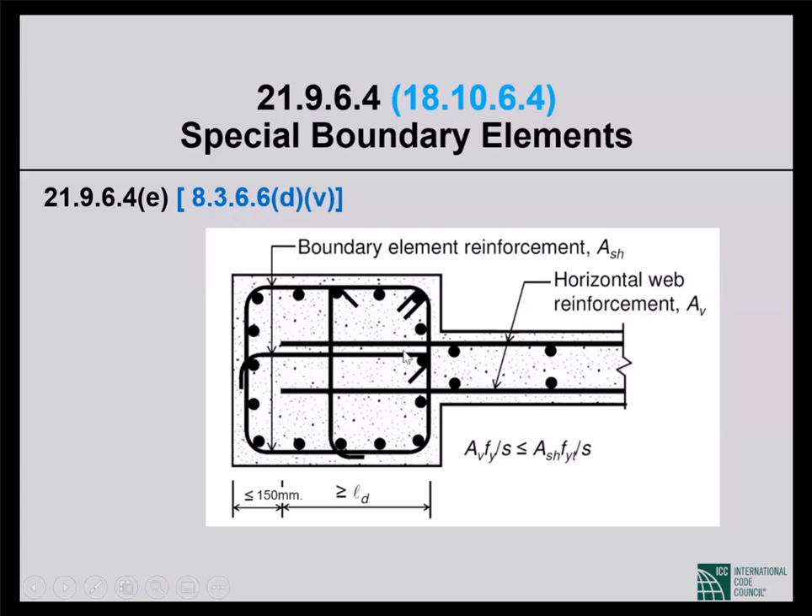Now we will allow you to use straight development length rather than hooked bar or headed bar development length, provided this inequality is satisfied. A sub v is the total area of the horizontal shear reinforcement. A sub sh is the combined area of the legs of the confining reinforcement. F sub y is the yield strength of the shear reinforcement. F sub yt is the yield strength of the confining reinforcement. So A sub v times F sub y divided by spacing, this is all for the shear reinforcement, must be less than or equal to A sub sh times F sub yt divided by the spacing of the confinement reinforcement. If this inequality is satisfied, we will allow you to use the straight bar development length.

Now, even when you do not need specially confined boundary zones because your calculated neutral axis depth came out to be less than the critical neutral axis depth, we may have to provide non-special boundary elements if the local reinforcement ratio at the ends of your shear wall exceeds 400 over f sub y, which is 2.8 over f sub y in your units. Again, even where specially confined boundary zones are not required, we will have to provide non-special confinement if the local reinforcement ratio at the ends of the shear wall exceeds 400 over f sub y, 2/3 of a percent for grade 60 reinforcement.

Now, when we say non-special confinement, that would mean every other bar laterally supported by a corner of a tie or a cross tie with 14-inch maximum spacing between any two supported bars. That non-special confinement will be provided over the length of the shear wall that we calculated for special confinement. So whether it is non-special confinement or special confinement, the horizontal extent of the confinement does not change. It is the same region that we confine.

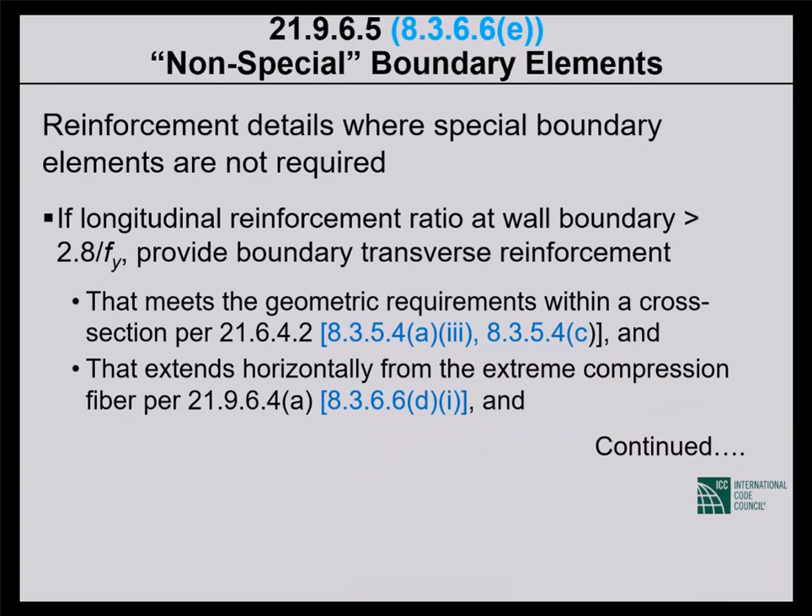Now the maximum spacing of this confinement reinforcement, this is where it is non-special. You remember it was very tight spacing, it couldn't exceed three different things. One was the minimum plan dimension divided by 3. Now it is a flat 8 inches, 200 millimeters in ACI 318-08. It will get significantly more complicated in ACI 318-14.

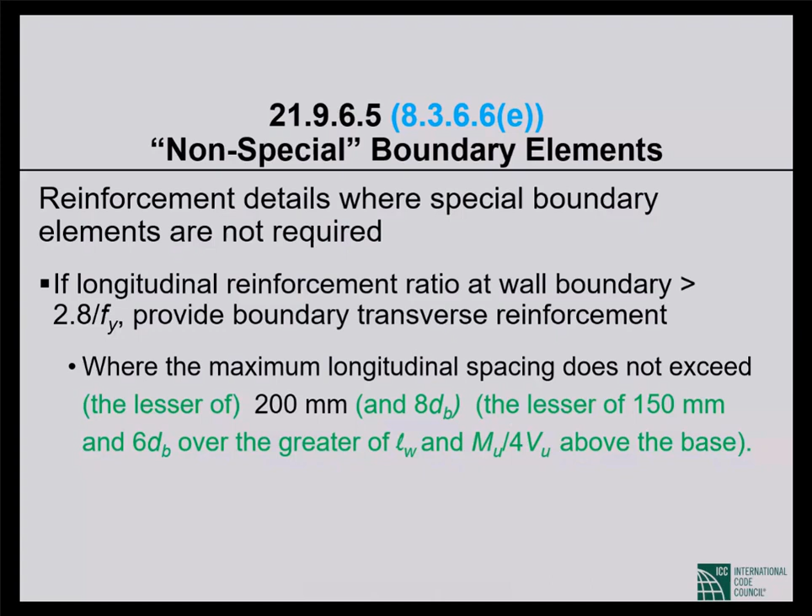318-14 says not just 200 millimeters, but the lesser of 200 millimeters and 8 times the bar diameter. Not only that, over this entire length, L sub W or M sub u over 4 times V sub U, whichever is the larger of the two starting at the base, the spacing goes down to 150 millimeters or 6 bar diameter, whichever is the smaller of the two. So it is going to be more complicated in the future, but for now, the spacing of non-special confinement is a flat 8 inches, 200 millimeters. That's where it is very much non-special.

Now, what is the local reinforcement ratio which, exceeding 400 over F sub y, will trigger non-special confinement? Sometimes, though not often, you may have uniformly distributed vertical reinforcement through a shear wall cross section. When it's a lightly loaded affair, there are no significant moments. This is not unusual. If you have uniformly distributed vertical reinforcement, then the local reinforcement ratio is the total area of 2 bars divided by the thickness of the wall and the spacing of the reinforcement, as simple as that. When you have uniform distribution of the vertical reinforcement, it is unlikely that you will need non-special confinement, but you definitely need to check.

More often than not, we concentrate most of the vertical reinforcement near the ends of the shear wall because we get more moment strength out of the same reinforcement that way. And it also makes the wall more deformable that way.

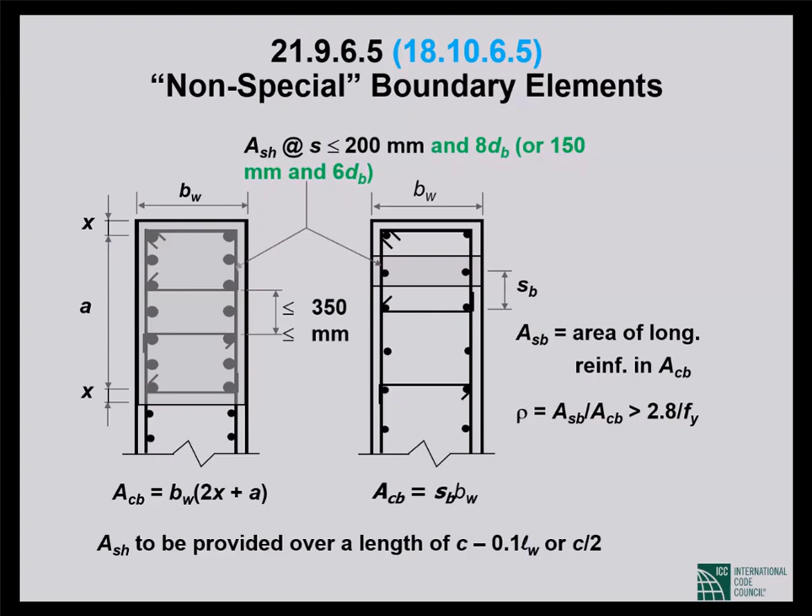Okay, pretty much the final item, the horizontal reinforcement. When we have specially confined boundary elements, we talked about how to anchor the horizontal reinforcement. If we don't have specially confined boundary zones, how do we anchor it?

Horizontal reinforcement terminating at ends of walls shall have a standard hook engaging the edge reinforcement as shown in the first picture, or edge reinforcement shall be enclosed in U stirrups having the same size and spacing as, and spliced to, the horizontal reinforcement. So you have to do this or that, but you have to do one or the other, because non-anchored horizontal reinforcement will not serve any purpose.

Okay, I have included here two pictures from the commentary to ACI 318-14. I have no intention of going into details, and this is not 318-08 versus 318-14. I want to give you the overall picture, which I think these two figures bring out very effectively.

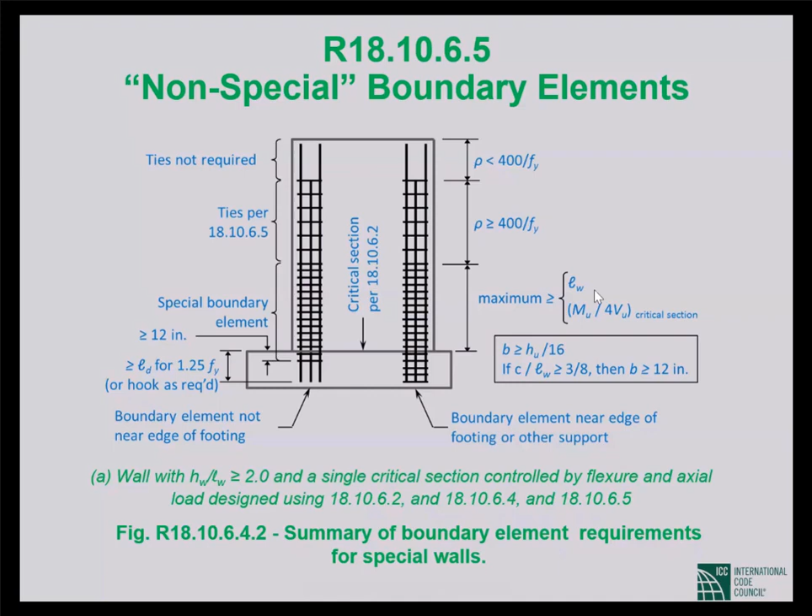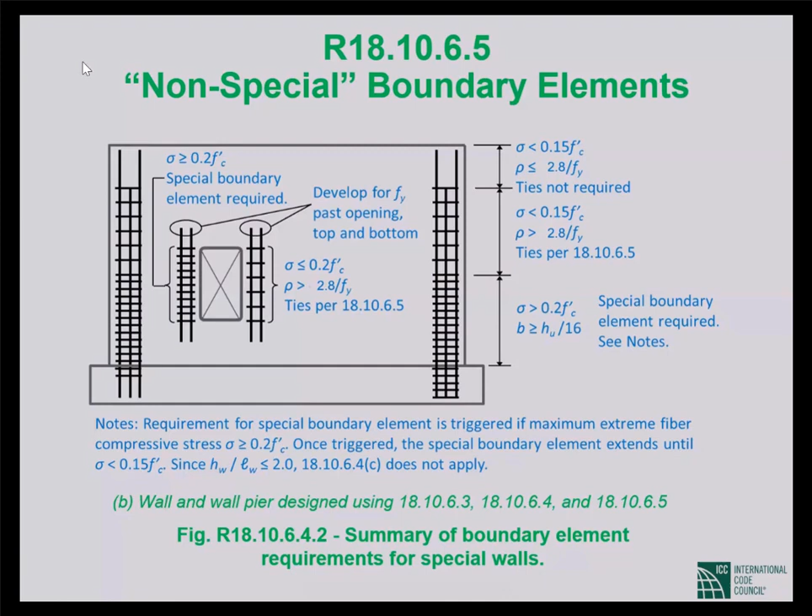Now, this figure is where we have used the displacement-based approach, so the trigger is based on neutral axis depth. The next figure is where we have used the conventional approach, but for the point that I want to make, it doesn't make any difference. The point is that we have special confinement and then non-special confinement, and then it is not no confinement, but the confinement that we need in non-seismic applications.

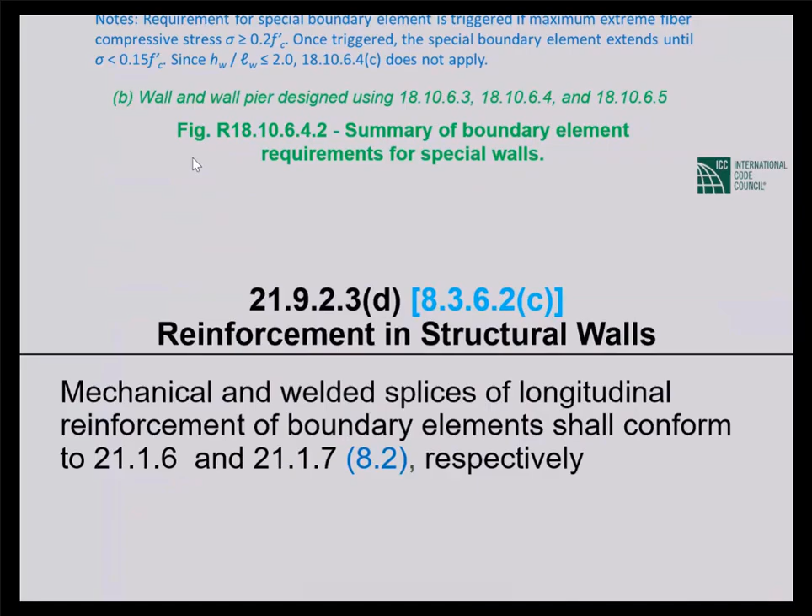Okay, so let me then proceed to the last bit. Mechanical and welded splices of longitudinal reinforcement of boundary elements shall conform to the sections that are given. It is 8.2 in your case.

Okay, that brings me to coupling beams. Now, after I started this seminar this morning, I thought that I should have included photographs or figures because it is my experience that coupling beams are not always understood. So I somehow didn't think of it earlier, and when I thought of it, it was too late.

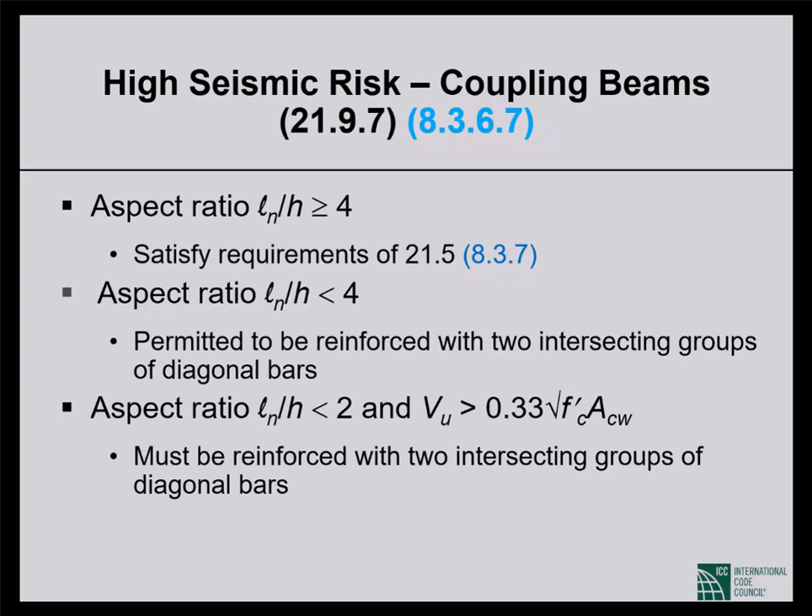So when we say diagonal bars, you shall have at least 4 bars. You can have 40 if you need them, but you cannot have 3. And these 4 or however many bars have to be tied and cross-tied like column bars. So when we talk about diagonal reinforcement, it is bunches of bars, 4 or more, intersecting diagonals, and the bars have to be tied and cross-tied like column bars.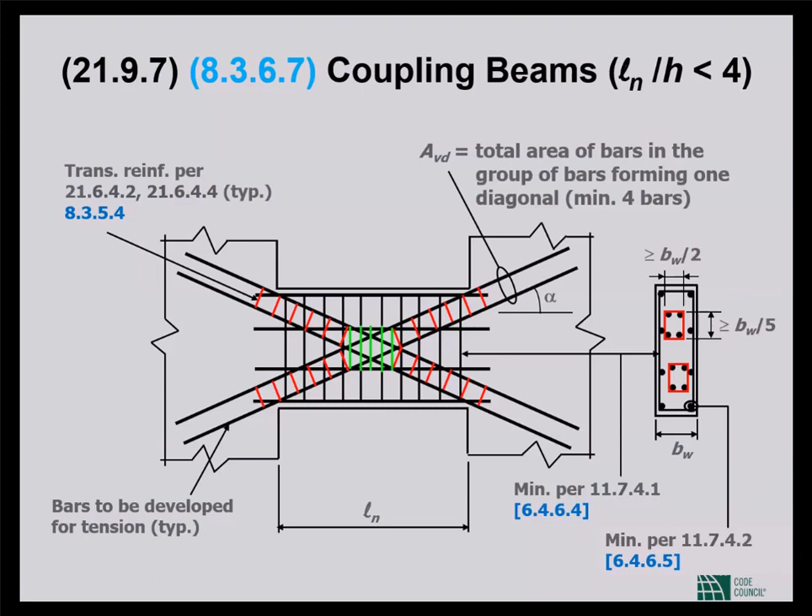In the intersecting area, you will have to be creative because you cannot confine both diagonals—it is physically impossible. But there are details given in ACI 318, shown in the picture, that I'm not going into. That's a little too much into the weeds for our purpose.

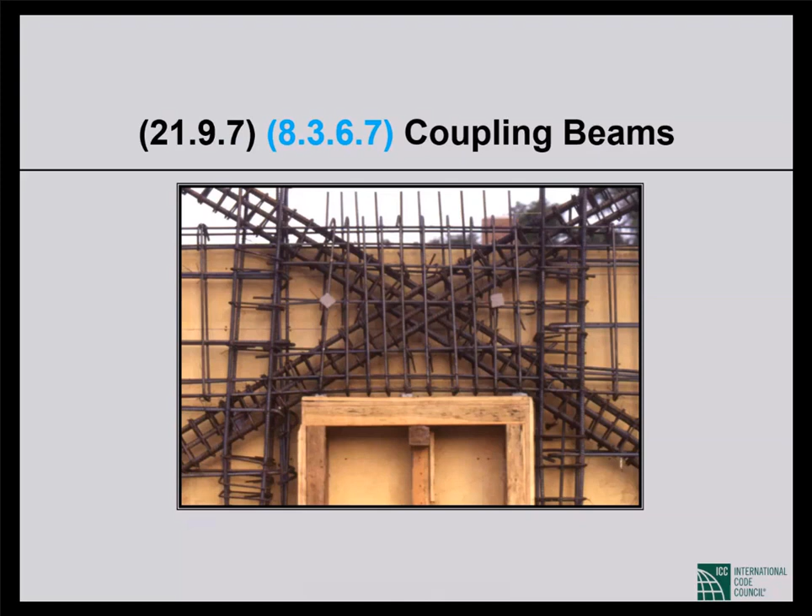Now, I did want to show you that these things have been done. This is a picture of a building that Dick Libby did in Honolulu. He was a practitioner there for a long time, but he retired, and that has been a long time. So this is an old picture and an old building, I would think from the 80s or 90s, something like that. That far back, this was done.

Much more recently, John Wallace at the University of California, Los Angeles has done quite a bit of testing of coupling beams, and these are his pictures. So this is a coupling beam that is on the slender side. You see the diagonal bars in the picture, and you also see the extent of confinement around that. This is a far view of the same thing. The point is that the beam is kind of slender, and you see the diagonal reinforcement.

This gives you an idea—this is a very good picture to show what kind of reinforcement we are looking at. Surprisingly, in Dubai, which is not high seismic at all, I have seen worse reinforcement. They provide even more reinforcement. I have no idea why—it doesn't make any sense over there, but in California, you need it.

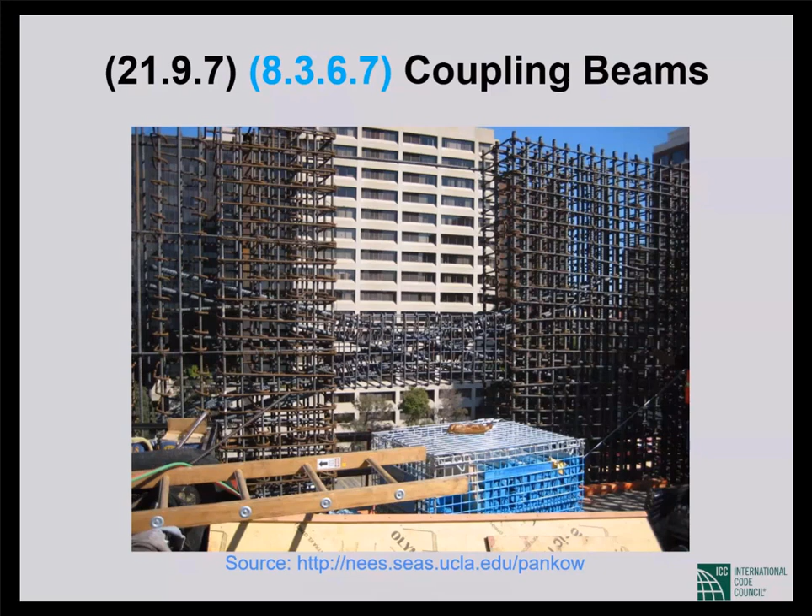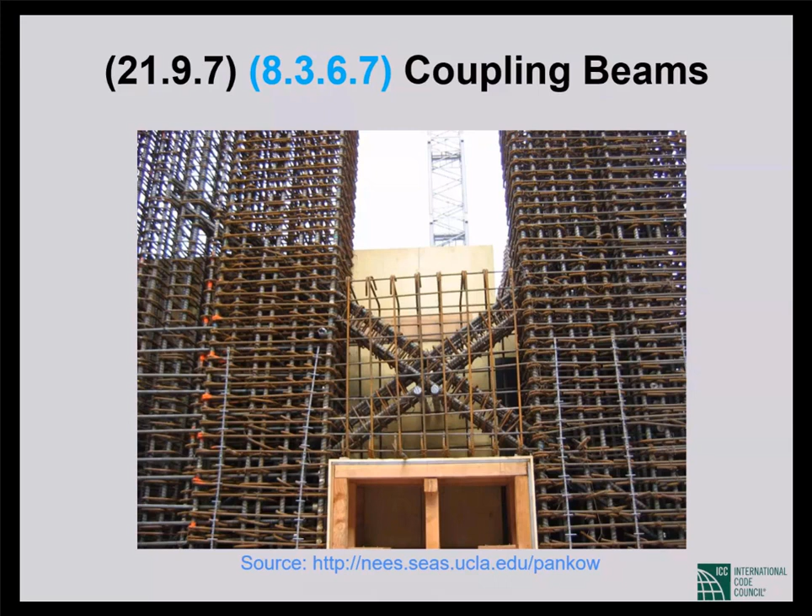So anyway, this is the diagonally reinforced coupling beam, and this is the other way around—a short, stocky coupling beam. The clear span to depth ratio is definitely less than 2. So it gives you an idea of what we are talking about with coupling beams and the reinforcement in them.

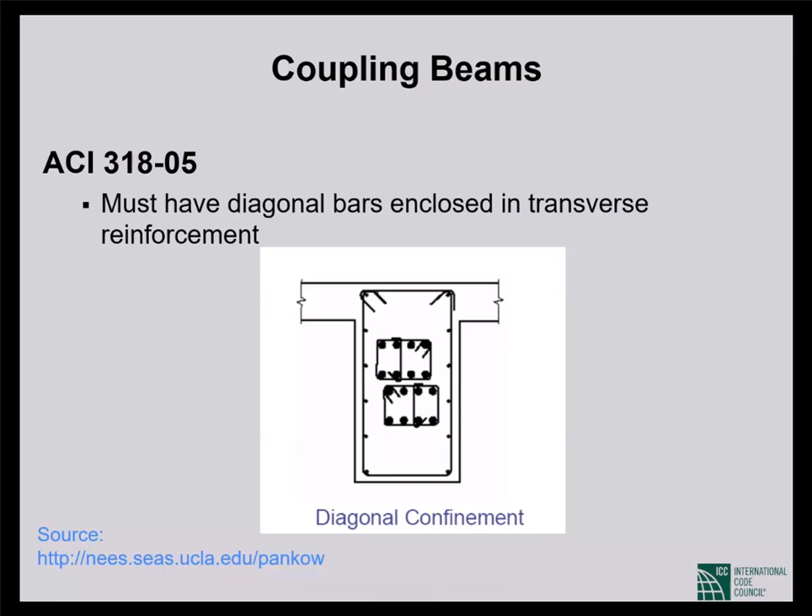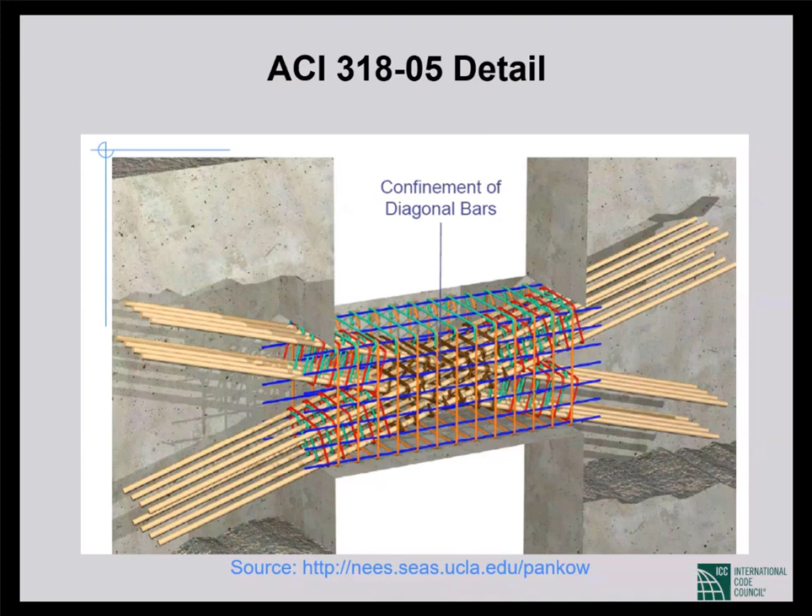So up until ACI 318-05, the only choice our code provided was confinement of the individual diagonals. But then, based on quite a bit of testing, John Wallace showed that we could provide an alternative where we confine the entire coupling beam section and not try to confine the individual diagonals. This is shown in the picture—you see the confinement reinforcement, and I will show you better pictures from John. This is individually confined diagonal reinforcement, the only solution we had under ACI 318-05.

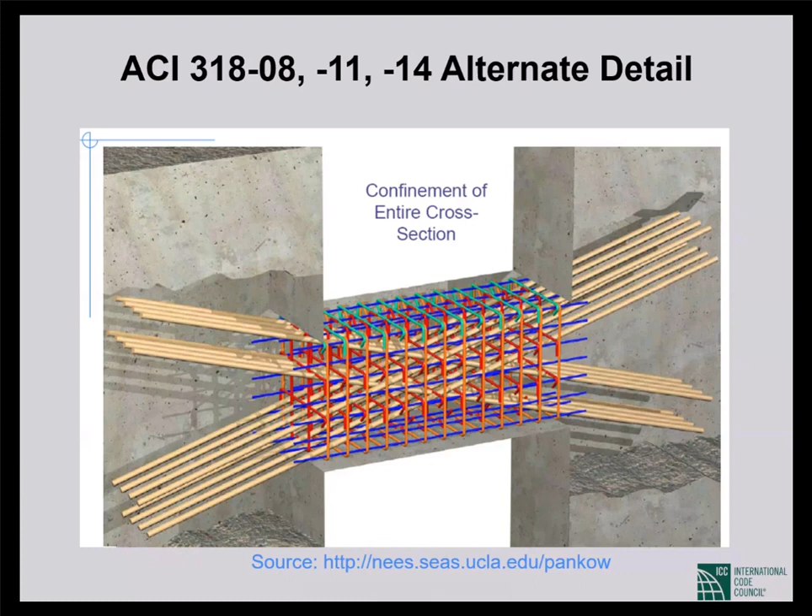From ACI 318-08 onwards, we have this alternative solution, much simpler, where we confine the entire coupling beam cross section. You should take particular note of the cross ties going into the coupling beam. I think this picture is very graphic—it is in color, so if you have an interest, you can see what is being done.

Okay, so that is pretty much as far as you will normally go with shear walls. Before I came to the coupling beams, that's basic shear wall design. Coupling beams, obviously, you may or may not have, but if you have them, and it is good to have them in seismic applications, then you now know the detailing requirements.

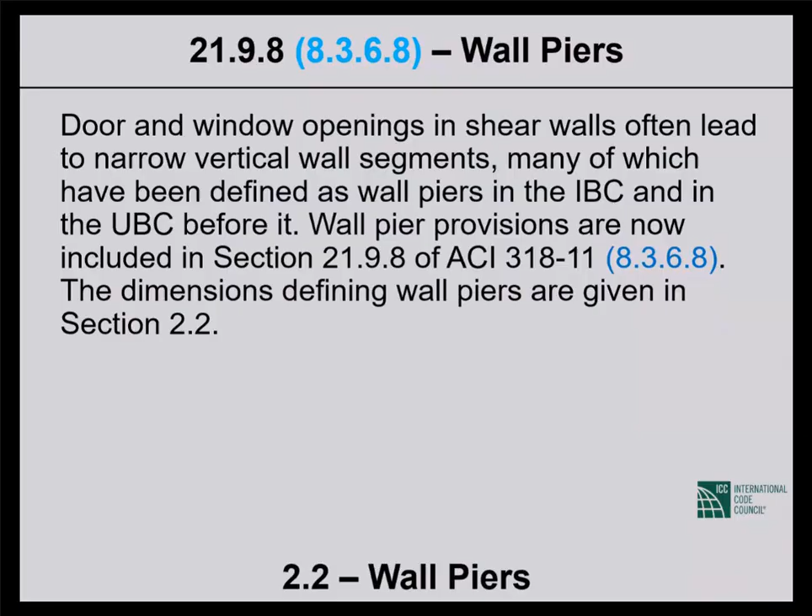The final thing that we probably should discuss are the so-called wall piers. Door and window openings in shear walls often lead to narrow vertical wall segments, many of which have been defined as wall piers in the IBC and in the UBC before it. Wall pier provisions are now included in Section 21.9.8 of ACI 318-11, 8.3.6.8 in your case. I am not sure they were in 318-08.

Anyway, it doesn't make any difference, you have it in 8.3.6.8. And so I want to give you also the requirements we have for wall piers. This is fairly recent in ACI 318, it came in either into, I believe, 318-11. I kind of hesitated yesterday whether to include it or not, because these wall piers are a big problem in what is called tilt-up construction, which is very big in California and some other parts of the country.

The contractor casts the shear walls on the slab on grade horizontally. So the wall would be cast on the slab on grade. These are typically big - these days they make offices out of them, but they typically used to be warehouses and things - so not tall, and large in plan. So these walls cast horizontally on the slab on grade were tilted up into place, and then obviously you put in place the roof or the diaphragm, whatever you want to call it.

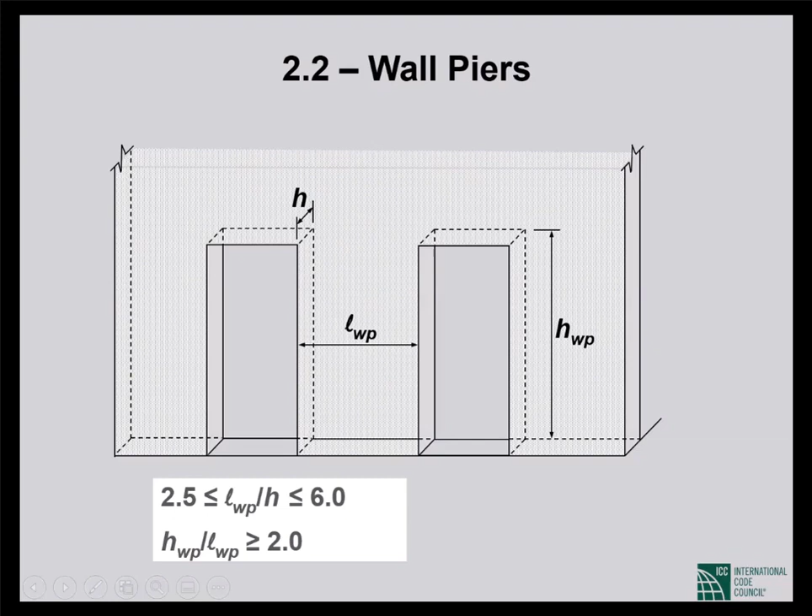So this is why we now have specific requirements. Anyway, definition of a wall pier: first of all, the height of the pier divided by the length of the pier shall be larger than or equal to 2. If it is shorter than that, then we don't have a wall pier, we have a wall. And the length to thickness ratio shall be between 2.5 and 6. That is a wall pier. In that range, the element is particularly vulnerable to shear failure. So shear failures of wall piers have been observed in previous earthquakes.

If it is larger than or equal to 2, then if the length to thickness ratio is up to 2.5, we have columns. Remember from yesterday, there are limitations on column dimensions. One of the limitations was the long side to the short side ratio cannot exceed 2.5. So as long as you do not exceed 2.5, you have a column, and you must design the wall pier as a column. This is a must. A column has to be confined, you cannot have one layer of reinforcement in a column. So for the length to thickness ratio below or up to 2.5, you have to detail your wall pier as if it is a column, because it is a column.

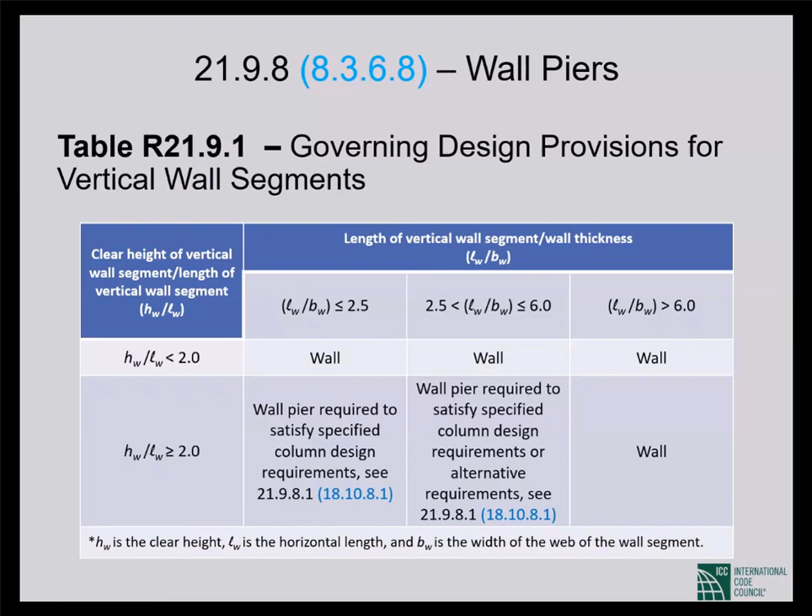If the length to thickness ratio exceeds 6, then you have a wall, not a wall pier anymore, and you will detail it as a wall. So this is very clear cut, and this is where we have gone in 318.

Wall pier provisions were in the IBC before, and before that they started in the UBC. I believe it was '94, or maybe '91. Anyway, it was in the UBC for 2 or 3 editions, then every edition of the IBC, but it did not make its way into ACI 318 until I believe 2011.

Now, something that we did not have in the UBC or IBC that ACI has added is shown in this picture. If you have a wall pier at the edge of a wall, there is some specific language addressing that condition.

Now, if the direction of earthquake force is as shown in the picture, then tension would develop in this sense in the wall pier, and the compression struts will form. This is a compression force, and to equilibrate it you will need the horizontal component of that diagonal force.

This will require tension reinforcement at the top of the opening in the wall pier. You will need reinforcing bars like that in order to equilibrate the horizontal component of that diagonal force.

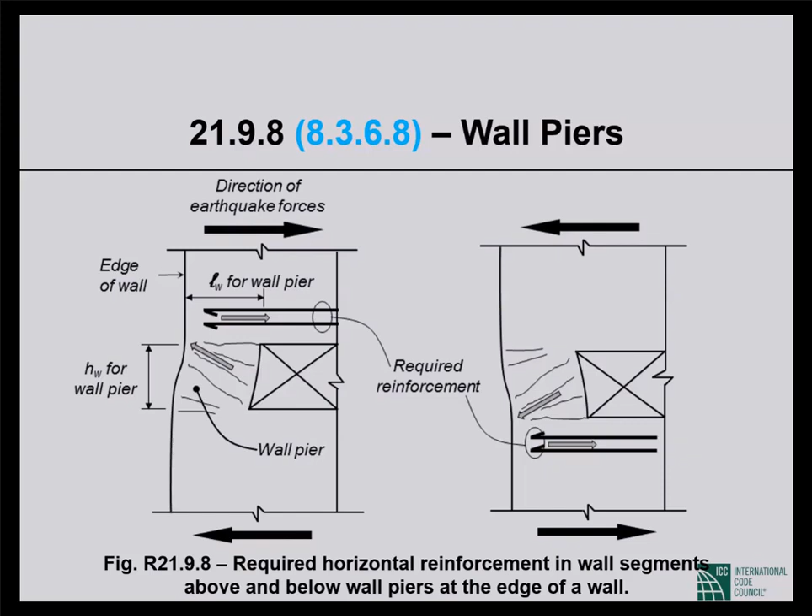If the direction of earthquake reverses, then the diagonal struts will form the other way, directed this way. Now we will need tension reinforcement under the opening in the wall pier, as shown in the picture. So those bars above and below the top of the opening are required for wall piers at the edges of shear walls by ACI 318.